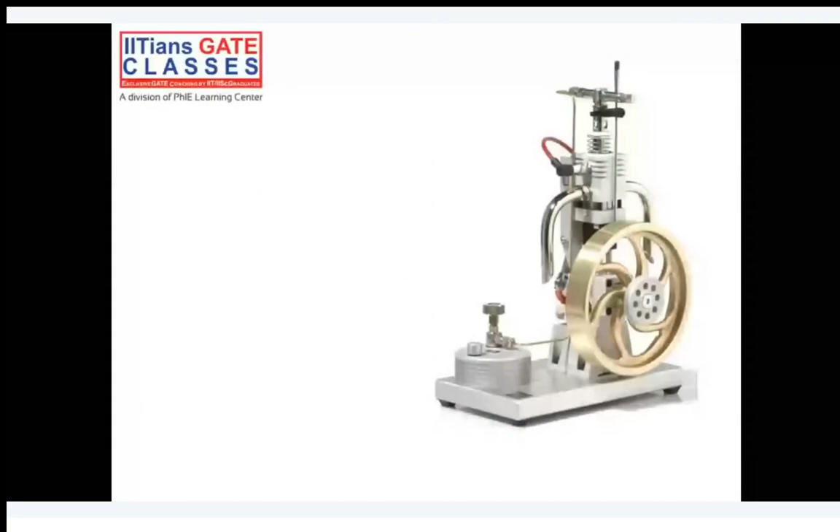So let's start with the definition of the flywheel. Can anyone tell me what is the meaning of flywheel and why we use it, or under what situation you use it?

Yes, it is used to store the energy. So in general, the proper definition would be: a flywheel is used to control the variation in the speed during each cycle of the engine. This last word is very important - cycle of the engine.

And can you tell me what is governor? That is the main reason we are studying these two topics together. Can you tell me what is governor?

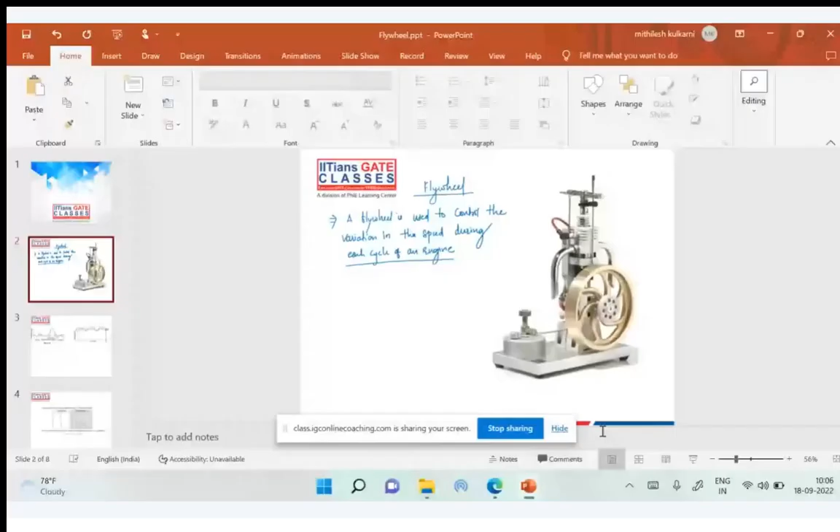So what we can understand - okay, let me share my screen again. Just give me a minute. How about now? Can you see my screen? Yeah.

I was talking about each cycle of the engine. Each cycle of the engine consists of suction stroke, compression, expansion or power stroke, and exhaust stroke. These are the 4 strokes of the engine which complete a cycle, right? So we know that we have to make sure our engine is running smoothly in all these 4 strokes.

It's not like it is running fast during power stroke and in the rest of the strokes it is running slow. In each cycle of the engine, we expect that our engine should run smoothly. So basically we are trying to avoid the fluctuation here.

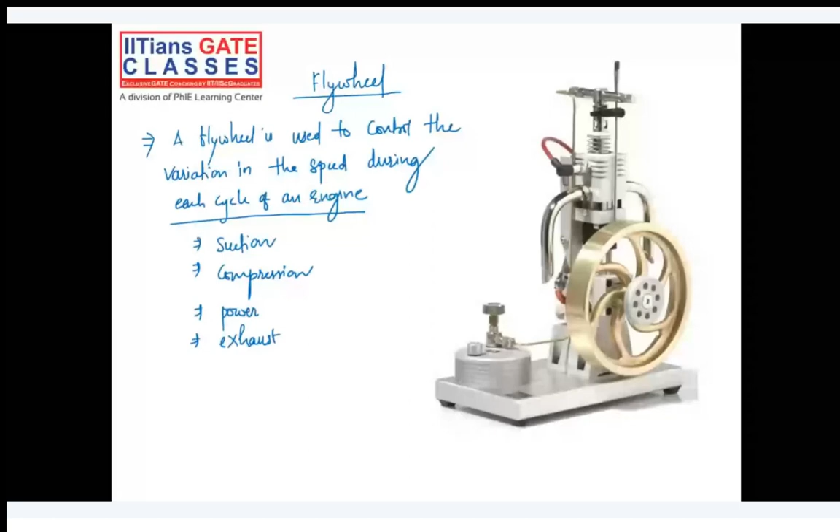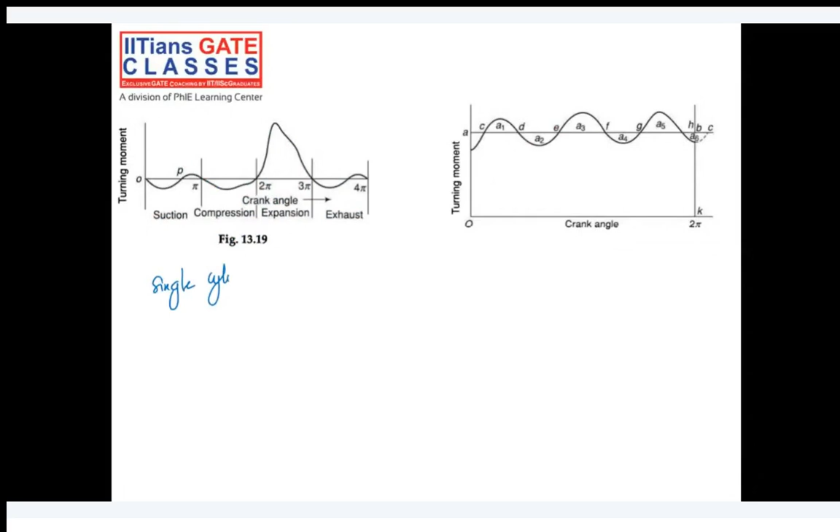Let's take a simple example - this is the turning moment diagram of a single cylinder 4-stroke engine. As I already mentioned, there are the names of the 4 strokes: suction, compression, expansion, and exhaust. And we have only one cylinder.

On the x-axis we have the crank angle. When crank angle is 180 degrees, we have completed the suction stroke. When crank angle is 360 degrees, that is 2 pi, we have completed the compression stroke. Since it's a 4-stroke engine, we have a separate stroke for each: suction, compression, expansion, and exhaust.

On the y-axis we have the turning moment. So this is called a turning moment diagram, where we have turning moment versus crank angle. If we are getting a turning moment positive, what can we conclude, and if turning moment is negative, what can we conclude - this is what you should know.

You can clearly see in this figure, in the expansion stroke the turning moment is positive. Basically, in case of expansion stroke, that means a power stroke, we are getting energy in that stroke, right? So the turning moment or energy is generated during that stroke. In the rest of the 3 strokes - suction, compression, exhaust - you can clearly see the turning moment diagram is on the negative side.

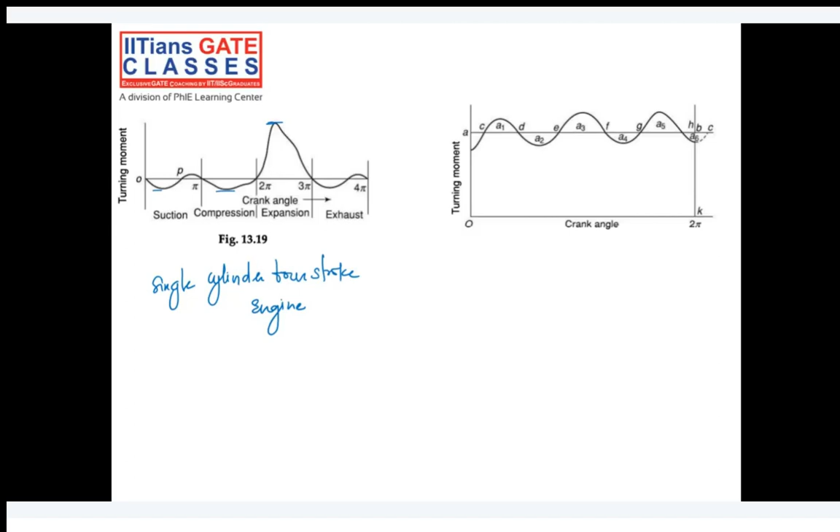So what will happen if I connect a lot of single cylinder engines together and call it a multi-cylinder engine? We generally use it in heavy vehicles. So, multi-cylinder engine - can I expect a similar diagram there, or will it be a little smoother compared to the first diagram? Yeah, it will be a little smoother because whenever we do the balancing of the engine...

We know we don't put the power stroke of all the engines at the same time. We use some ratio in order to do the balancing - we'll study that in the balancing of engine topic. But as of now, you should know that if you are using a multi-cylinder engine, the power stroke of all engines will not occur at the same instant.

At some instance, power stroke happens for, let's say, two engines, and after that power stroke happens for the next two engines. So basically what we are doing is balancing out the forces when we do the multi-cylinder engine. Because of that, at any instant, if you want to calculate the crankshaft torque - or turning moment - it's given by the sum of the torque developed by each cylinder.

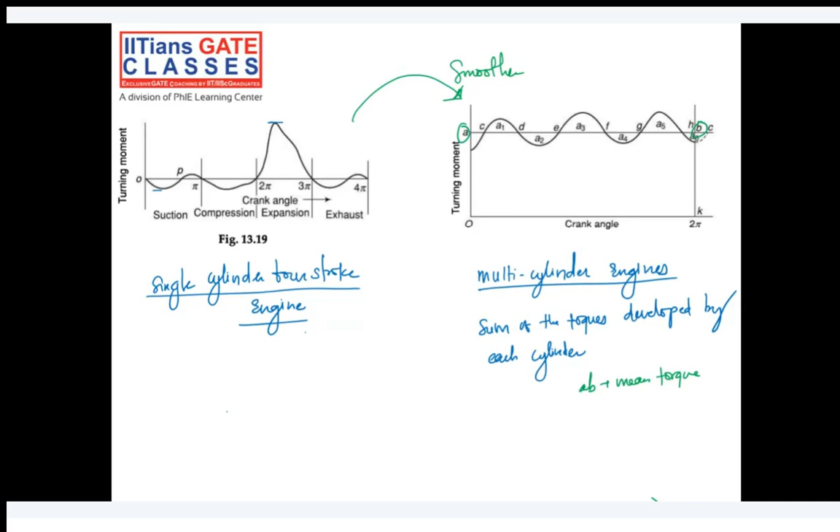We cannot avoid the variation here. We get power in the power stroke, we get energy in the power stroke, but we need energy in the rest of the strokes. So the fluctuation of energy is a lot in case of a single cylinder engine, whereas in a multi-cylinder engine it is comparatively less. So flywheels are very important for single cylinder engines.

So I used the word fluctuation of energy. Let's try to understand what is the fluctuation of energy for different crankshaft positions. From figure number B, we will try to trace it out - we'll use the second figure to understand the fluctuation of energy. You can clearly see here A1, A2, A3, A4, A5.

These are the little fluctuations compared to the mean torque, where A1, A3, and A5 are the areas where the torque developed is above the mean torque, AB.

So we can expect that in areas A1, A3 and A5, our flywheel will store the energy. Whereas in the other areas like A2, A4, and even A6 here.

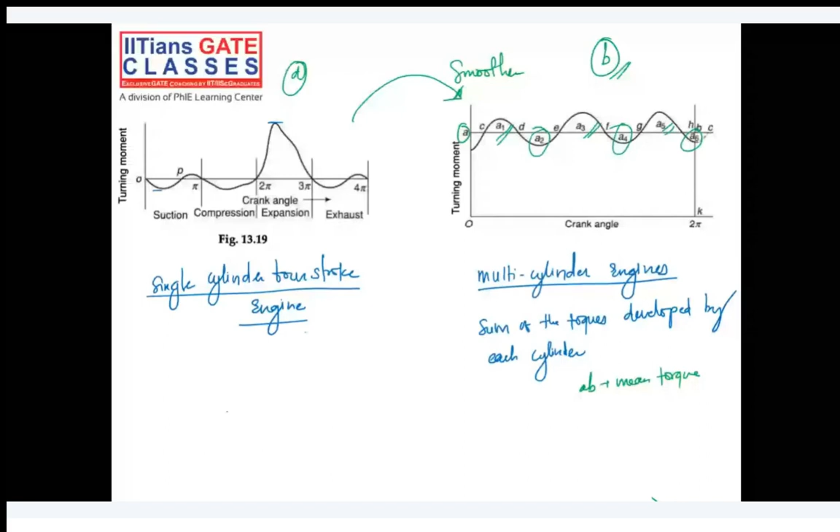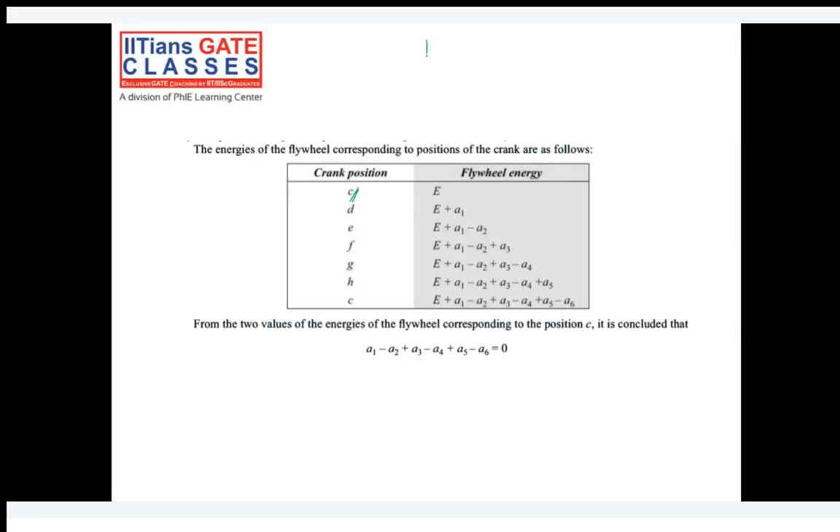So I'll go to the next slide now to make a chart. So at position number C, let me try to draw it here. This is C, D, E, F, G, H. This is A1, A2, A3, A4, A5 and A6, for example. Again this point is suppose C, and the same figure repeats again, C to H.

At point C, at crank position C, let's say E is the energy in the flywheel. At point D, A1 energy will be added to the flywheel, so it becomes E plus A1. At point E, we have added A1, but subtracted A2 energy out of it, so it is E plus A1 minus A2.

Then at point F, we have added the A3 energy. Then we have subtracted A4 energy at point G. Then by the time we reach point H, we have added A5 energy to it, and by the time we reach point C again, we have subtracted A6 energy out of it.

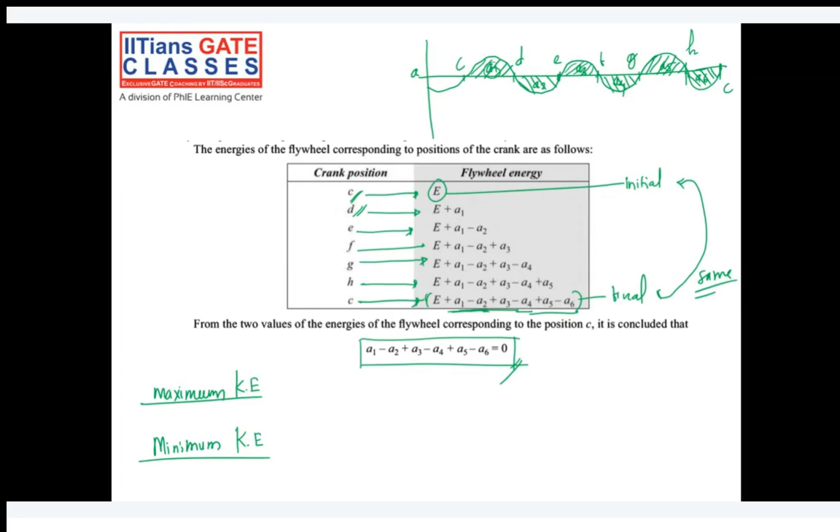So minimum kinetic energy and maximum kinetic energy correspond to maximum speed, because kinetic energy is half of I omega square. Since I is same, only omega is changing, so it corresponds to maximum velocity or speed. This corresponds to minimum speed.

And the difference between this maximum kinetic energy and the minimum kinetic energy is the maximum energy which can be stored in the flywheel. So that is delta E, the energy stored in the flywheel.

The difference between maximum and minimum kinetic energy of the flywheel is known as maximum fluctuation of energy. That much will be the maximum fluctuation of the energy, or we can say that much amount of energy we can store in the flywheel.

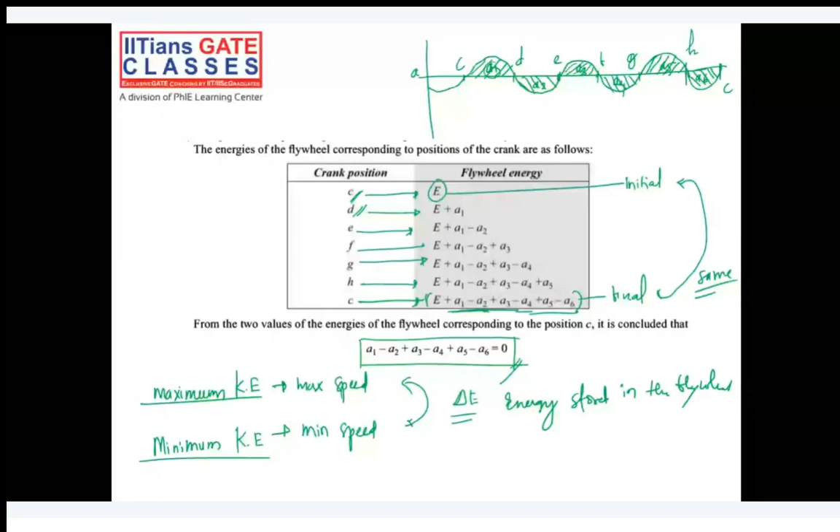So let's try to calculate this delta E through some formulation. Can I proceed to the next slide? We'll start with a simple example. Let's say we have a flywheel.

For example, this flywheel rotates at a maximum speed of omega 1, that is max speed, and omega 2 is minimum speed, for example. So maximum fluctuation of energy, I can say,

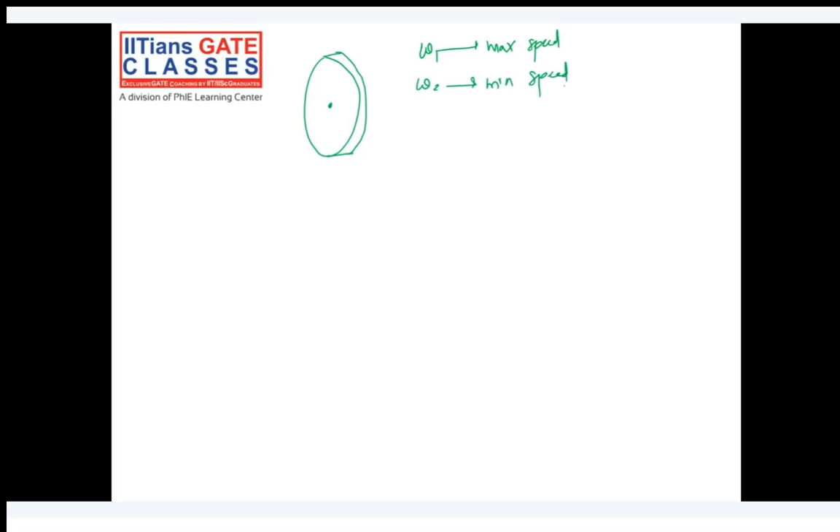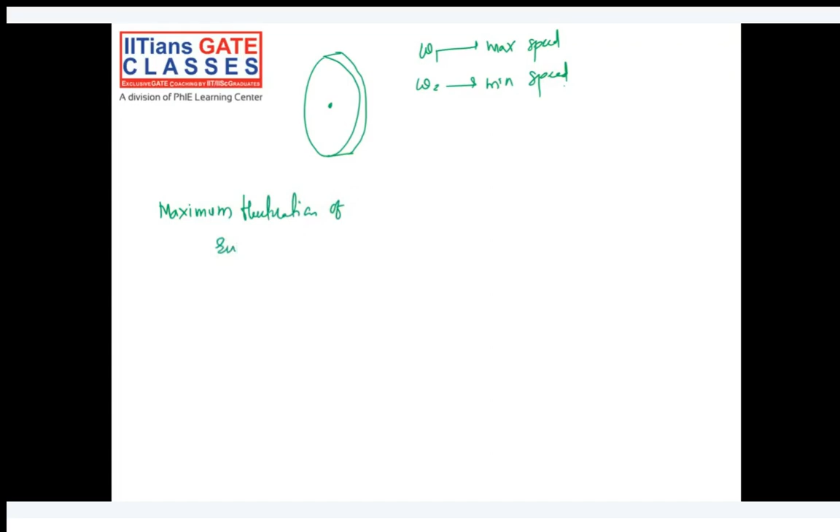delta E would be half of I omega 1 square minus half of I omega 2 square. We can write it like this. Difference in the maximum kinetic energy and minimum kinetic energy will be the maximum fluctuation in the energy. Minimum kinetic energy will be corresponding to the minimum speed of the flywheel, and maximum kinetic energy will be corresponding to the maximum speed of the flywheel.

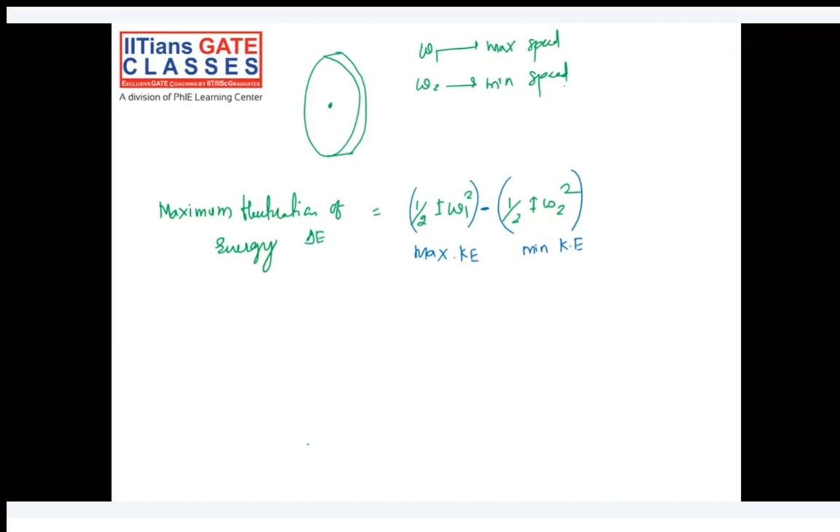So from this I can take half of I as a common, omega 1 square minus omega 2 square, you will get. Half of I omega square. I is nothing but your mk square, mass moment of inertia. I is equal to m is a mass and k is a radius of gyration.

Omega 1 square minus omega 2 square, you can relate it to a square minus b square formula. A square minus b square is equal to a plus b and a minus b. So I can split this into omega 1 plus omega 2 and omega 1 minus omega 2. This 2 I will write here. Sum of omega 1 plus omega 2 divided by 2 will be average, you can say mean speed.

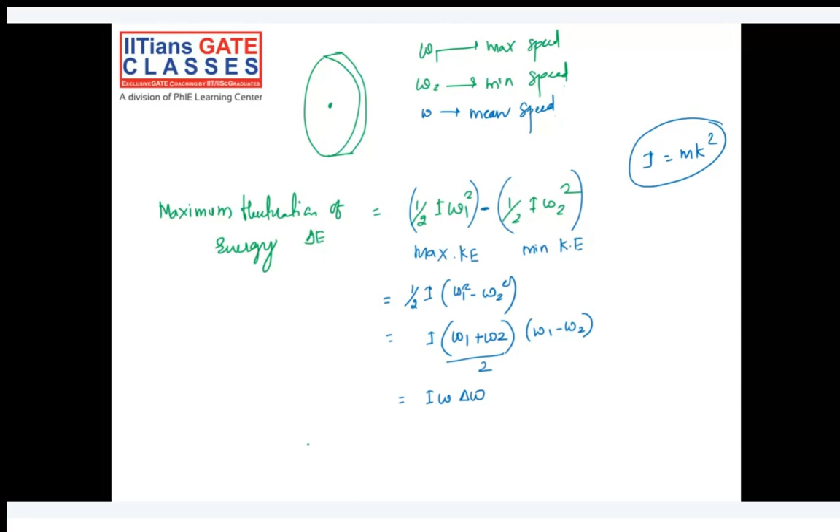Omega 1 minus omega 2 is delta omega. So here omega is a mean speed. So there is one term, this delta omega, which is omega 1 minus omega 2.

So if I multiply with omega and divide with omega, this formula will further change to I omega square delta omega by omega, by multiplying and dividing with omega. I omega square delta omega by omega. So that is your delta E.

I'll go to the next slide, I'll repeat here. We got I omega delta omega, and then we got I omega square delta omega by omega. Delta omega by omega is nothing but the K. And what is this K? Coefficient of fluctuation of the speed.

K is equal to delta omega by omega. This is coefficient of fluctuation of speed. So what is the meaning of it? Change in the speed with respect to the mean speed. So it is a ratio of maximum fluctuation in the speed divided by mean speed.

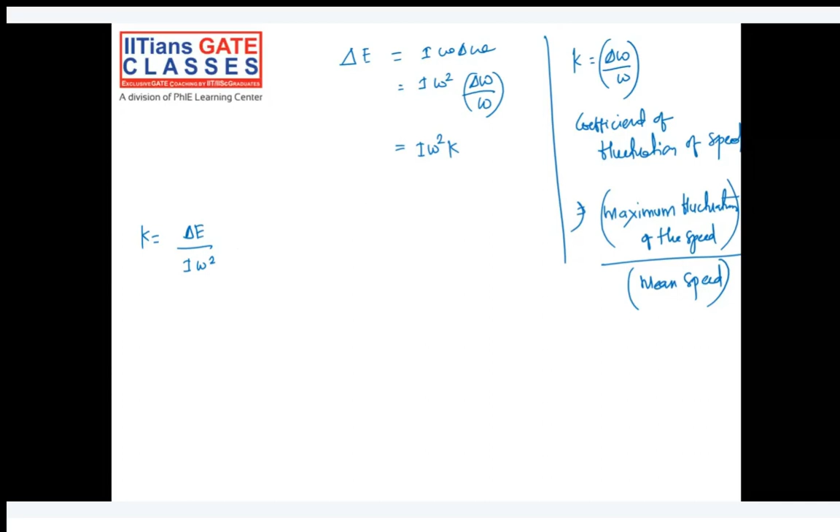Delta E, if you keep it as it is, divided by I omega square, you can multiply by 2, divide by 2. So what is the formula for this? Half of I omega square is what? It's half of I omega square is our mean kinetic energy, can you say, or the mean energy,

because omega is our mean speed. So corresponding to that energy will be our, let's say, a mean energy. So can I write it as delta E divided by 2 times E? E is energy corresponding to the omega. Change in E, delta E divided by 2. So K can also be written as delta E divided by 2E.

One more point here I would like to explain, what is this K? K is our coefficient of fluctuation of the speed, that is delta omega by omega. So here we got one term delta E by E. Delta E by E is nothing but, similarly you can write it as, that is change in the energy, or the maximum fluctuation of the energy to the work done per unit cycle, or the mean energy in general, will give you the coefficient of fluctuation of energy.

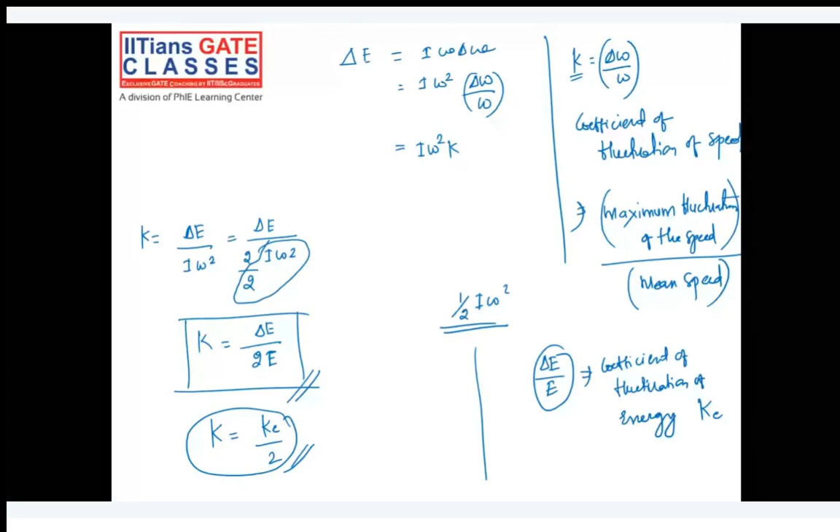I will collect everything on the next page now. So what is K? K is coefficient of fluctuation of the speed, delta omega by omega. And Ke is coefficient of fluctuation of the energy, delta E by... what is delta E? Maximum fluctuation in the energy, that is equal to I omega delta omega. We have further made it as I omega square K.

And we know that K is equal to Ke by 2. This is all. These formulations you should know. All the formulas I have collected here. What is omega? Omega 1 plus omega 2 divided by 2. What is delta omega? Omega 1 minus omega 2. What is omega 1? Maximum speed. What is omega 2? Minimum speed. Okay, is it clear till this?

So, will you be able to calculate the energy stored in the flywheel? If a question comes in exam, how much energy will be stored in the flywheel if they have given you the I value and omega 1 and omega 2 values?

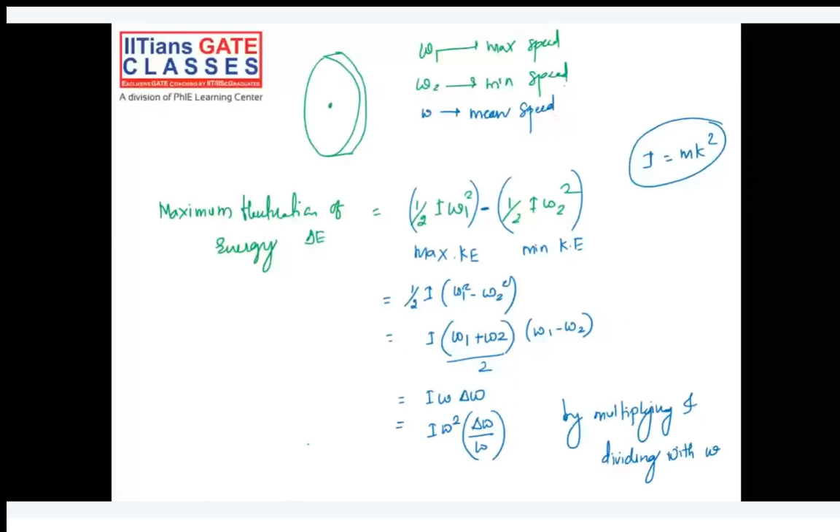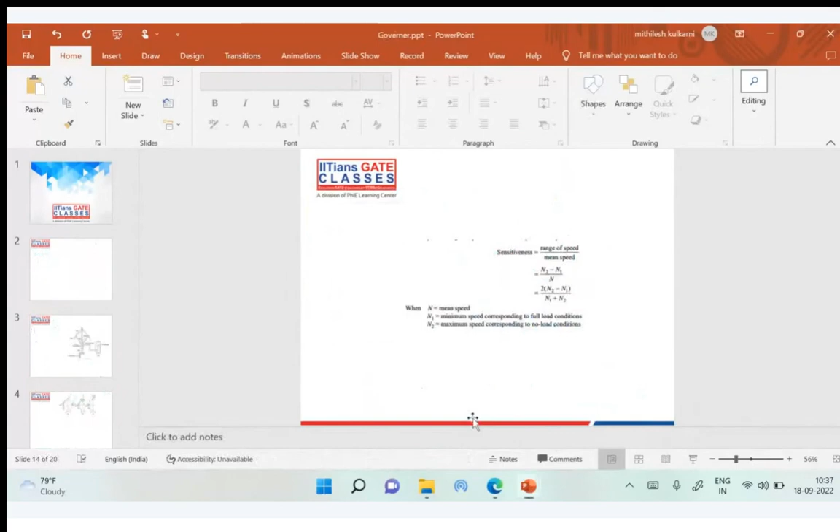Okay, if no doubt, then I'll open another presentation for the topic governors. Okay, so write down heading: governors.

Can anyone tell me what is the difference in flywheel and governor? Roughly, you can say in few words. What do you think? Are they same or are they different?

Yes, one of them is used to regulate the load variation, other used to regulate during each cycle. Correct, because let's say if we are in the bus or the truck, and a truck is fully loaded, then the load on the engine will be more at that time. Let's say it's half loaded, then load will be less compared to the first, and if it's not at all loaded, then again the load on the engine will be less.

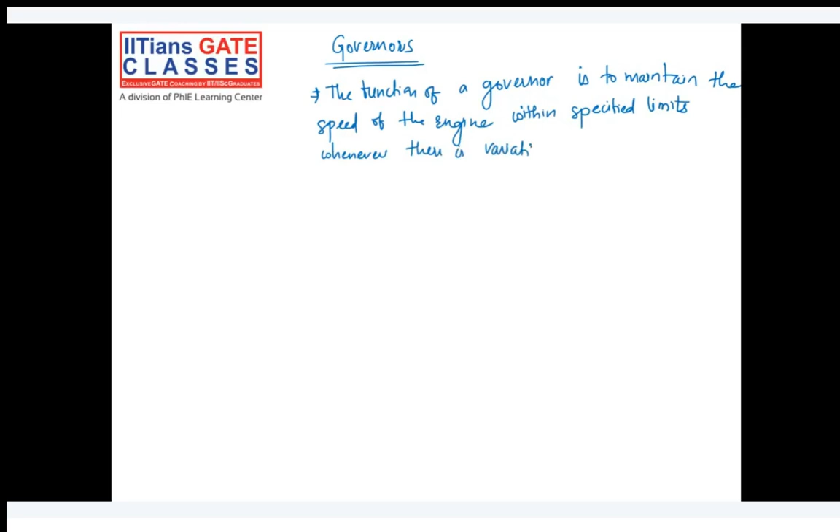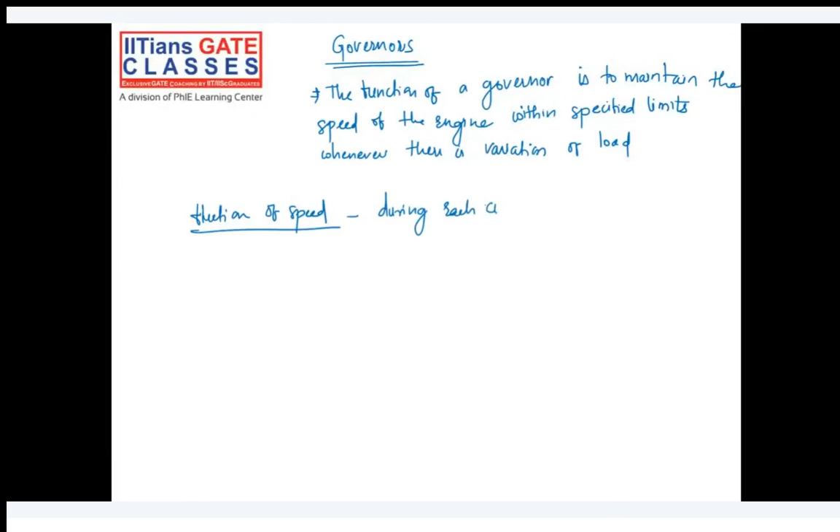So fluctuation of speed - again we are using the same word, fluctuation of speed. And as I already mentioned, the fluctuation of speed can come during each cycle, and the flywheel is capable of handling it. Whereas the fluctuation of speed, as I mentioned, also can come from the variation in output torque of the engine, or basically load variation. Load variation, and governor will be able to handle it.

Is it clear till this? Have you understood the difference?

Okay, so can I say, let's say if you have a governor fitted in a bus or truck, whether it will operate continuously. Let's say we have a truck that is loaded and running on a highway with a certain speed. Will this governor be active during that time? Because there is no change in loading, right? So in that case, in each cycle, the governor will not work.

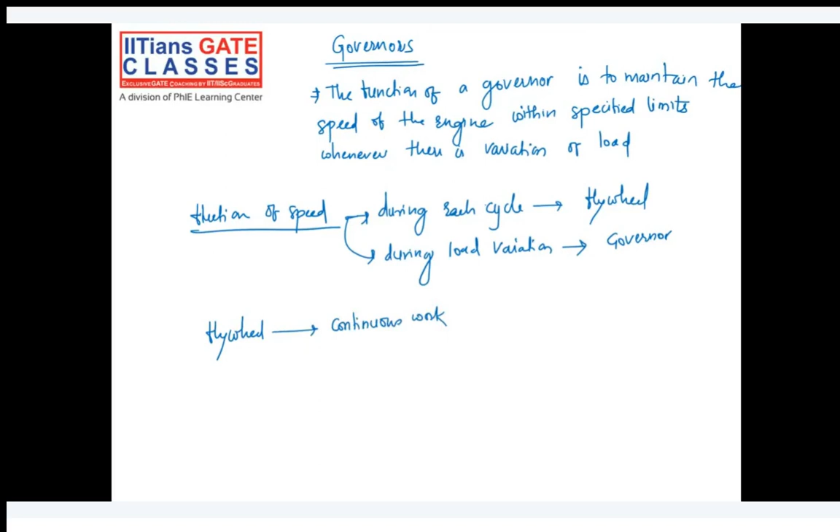Okay, flywheel is doing continuous work, whereas governor is intermittent. Whenever required, it will do work. Because let's say if we have a vehicle which is running at a constant speed with a constant loading, the governor will not be working at that time. There is no need for the governor to be active at that time. So it will not operate in the general way, we can say.

But I have given you the example of a single cylinder engine and a multi-cylinder engine. In a multi-cylinder engine, I would expect very little fluctuation in the energy compared to the single cylinder. So it is worth using a flywheel only in the single cylinder engine, where we see a large fluctuation in the energy. A flywheel may not be used if there is not a lot of cyclic fluctuation in the energy output. But a governor is always essential in all types of engines, because we have to adjust the supply and demand. Depending on different loading, we need different torque, and the governor is necessary irrespective of whether you are using a single cylinder or multi-cylinder engine. Are you following these points?

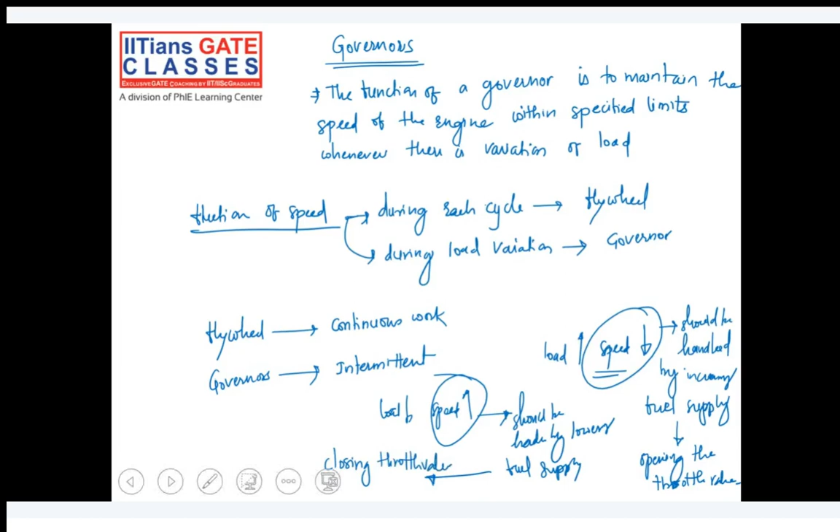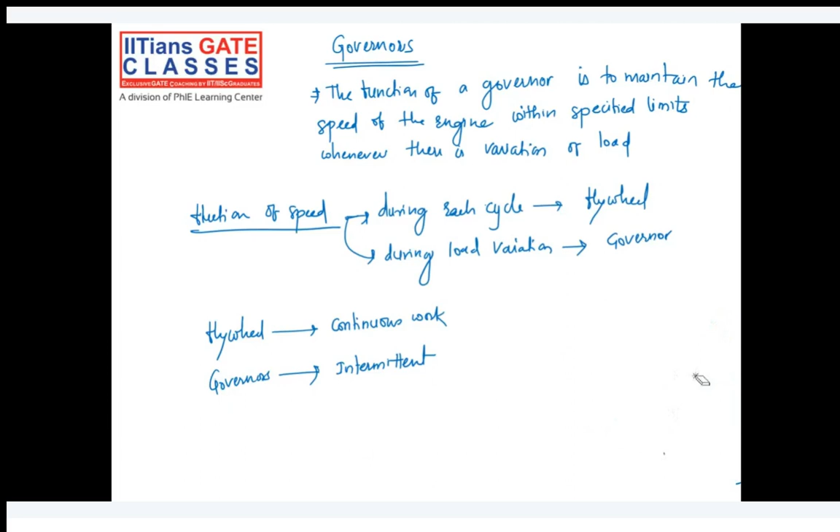Let me rub this out and write it in a better way in the next slide, because the next slide will help you understand more easily than writing on the same slide. So you can clearly see, this is an engine. If the load increases, the speed is reduced, and it is handled by increasing the fuel supply. And how will you do this? Opening the throttle valve.

Okay, so if you open the throttle valve, opening the throttle valve means if you rotate this throttle valve to, let's say, a 90-degree angle, like this, then it will fully open. Fuel supply will be more. So if fuel supply is more, then again you can increase the speed and basically maintain your speed.

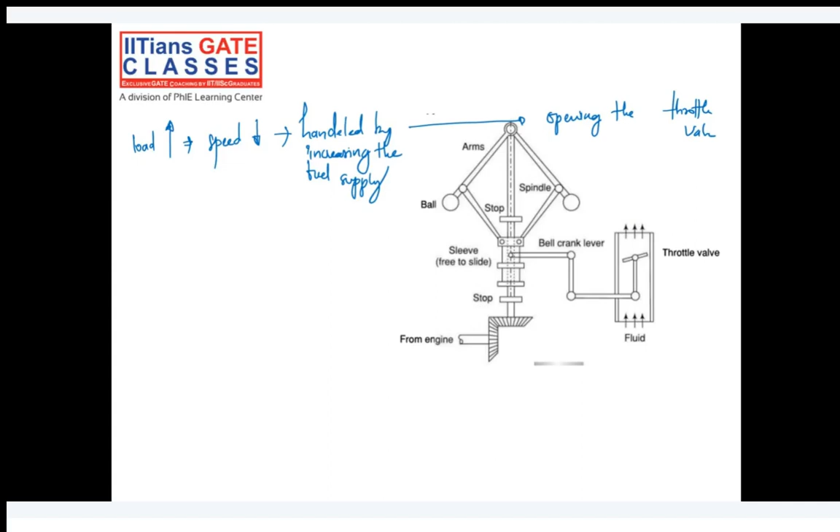On the other hand, if load is reduced, speed will increase, and this is handled by the governor. We should decrease the fuel supply. And how will you decrease the fuel supply? By closing the throttle valve. This means we are trying to make this throttle valve horizontal in order to lower the fuel supply. So I hope you understood how exactly this is different from the flywheel and how it operates.

Basically, the ultimate aim of the governor is to operate the throttle valve. Governor is used to operate the throttle valve. What the governor does is operate the throttle valve, and indirectly, by operating the throttle valve, we are controlling the fuel supply, and by controlling the fuel supply, we can either increase or decrease the speed of the engine. So this is how they are linked to each other. Is it clear till this?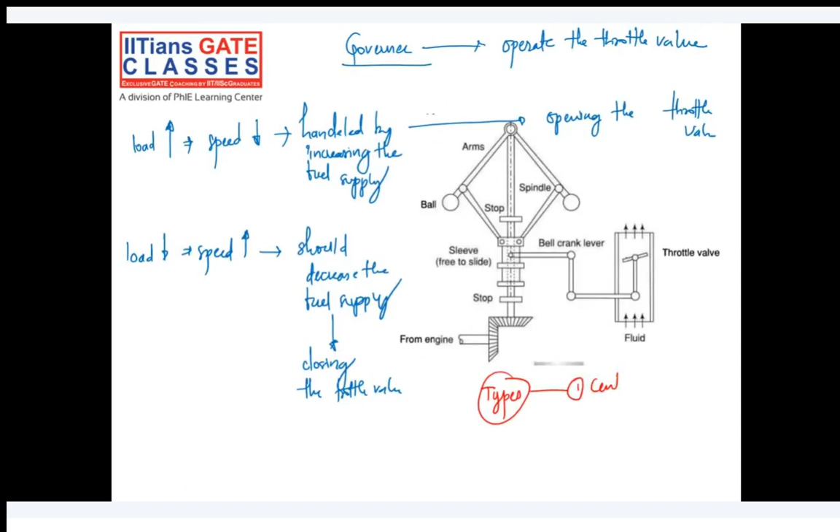Any doubt till this? Okay, so there are two types of governors. Governors are of two types. First type is centrifugal. Second type is inertia. Okay, centrifugal governor and inertia governor. So let's try to understand them in detail.

What is a centrifugal governor? This is the more common type. Centrifugal is commonly used, and its action depends on the change in the speed. The name itself indicates that, because of the centrifugal force, this governor will operate. Let's look into this figure. We have a pair of masses, let's call them balls, which are fixed to the arms. This is a spindle. When you rotate the spindle at a constant speed, the distance between the two balls will remain constant. But if you increase the speed, the balls will try to move away from each other because of the centrifugal force, and indirectly it is lifting the sleeve.

And if the sleeve is lifted up, it will close the throttle valve, because speed is increased and it's time to close the throttle valve. If speed is reduced because of higher loading, then these two balls will come closer to each other. The sleeve will go downwards and it will open the throttle valve, making sure enough fuel is flowing through it, which will help to increase the speed. I hope you understood the centrifugal governor, which is more common.

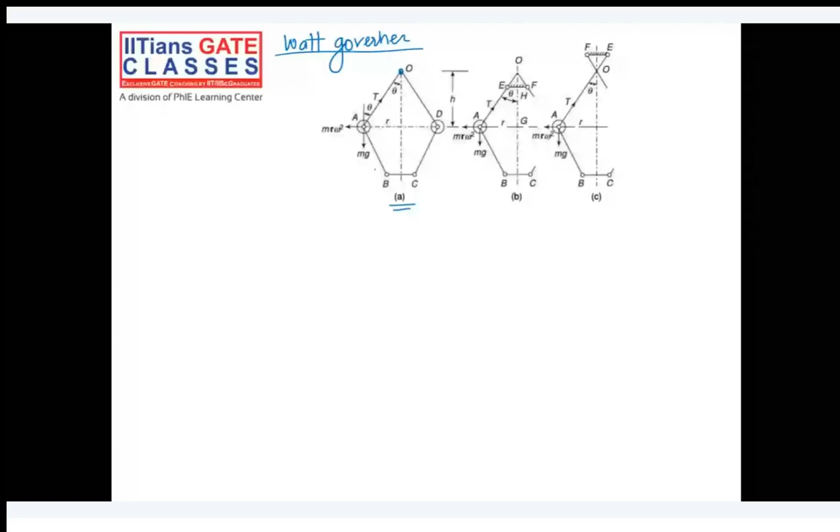Okay, so this you can convert like this, or this you can convert like this. Rather than a single point, if you replace it with a link EF, you can call it the open arm type Watt governor, and this is the crossed arm type Watt governor. In the second case, we are making a crossed arm. So they are just two different types of it. Our focus will be on the first figure A itself, but figures B and C are more or less the same. It's just a different type of it.

Okay, so let's now focus only on figure number A. I just explained how B and C are generated. If you replace point O with the horizontal line EF, you call it the open arm type, and if you cross the arms and create a link FE, you call it the cross arm type Watt governor. Okay, so let's try to understand figure A now. As the spindles are rotating, balls will take up a position. Depending on whether the speed of the spindle is increased or decreased, arms will move away from each other or towards each other because of the centrifugal forces.

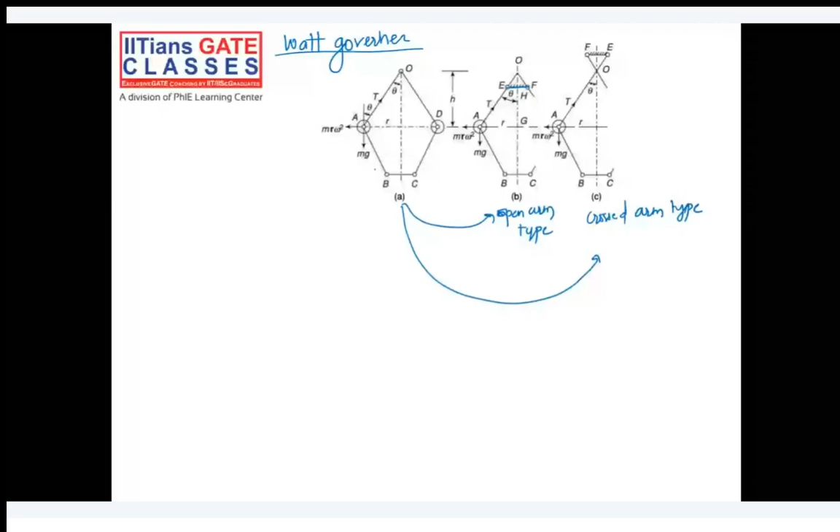Okay, so just to let you know, here small m is the mass of each ball. H is the height of the governor. W is the weight of each ball, which is mg. Omega is the angular velocity of the arms and sleeves. I'll go to the previous figure. The angular velocity of the spindle will be the same as the angular velocity of the sleeves, and that will be the same as the angular velocity of the balls. So I'll just use the words angular velocity. It is the angular velocity of the balls, arms, and sleeve. T is the tension in the arm.

Okay, we are drawing a free body diagram of point A just to make sure what forces will get applied on the arm. R is the radial distance to the ball center. This is R, the radial distance from the ball center to the sleeve center. So assume that these links are massless and you neglect the friction of the sleeve.

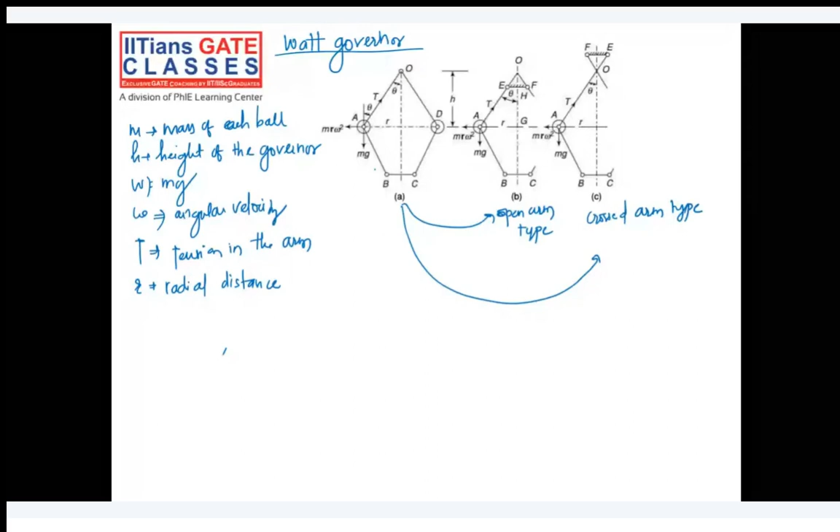Okay, and how will this point A look under the action of equilibrium? Point A will have mg force in the downward direction, mr omega square force, which is the centrifugal force, in the outward direction, and T is the tension in the upward direction. So if I split this tension into two components, T cos theta and T sin theta, I will be able to write, let's write here itself first: T cos theta is equal to mg, and T sin theta will be equal to mr omega square.

Okay, I hope you understood how I have written this. So if this is T, this side is T cos theta, and this side is T sin theta. So I'm just equating the forces. You might have studied this in mechanics. So the ratio of this will be tan theta.

So m will get cancelled. So it's r omega square by g.

Tan theta can also be written as r by h. This is your r and this is your h. So r by h is tan theta. So you can say h is equal to rg divided by r omega square. So rr will get cancelled. So h is equal to g by omega square.

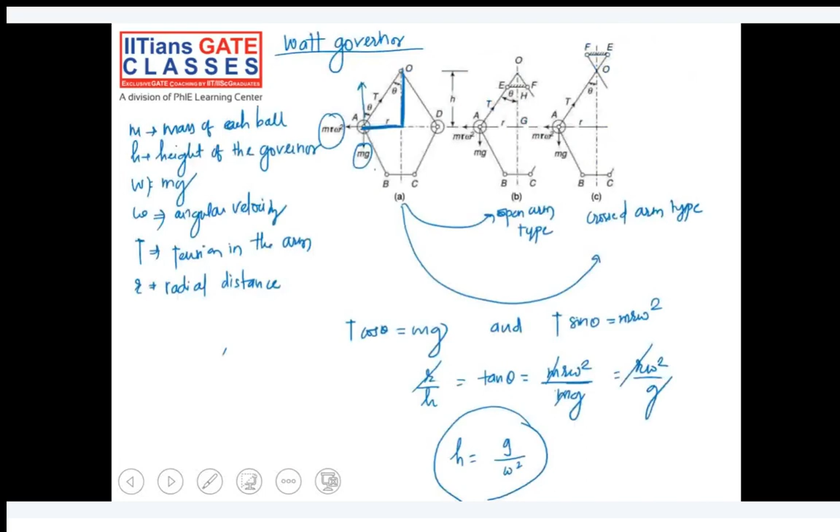Okay, try to understand this height will change. As the speed is increasing, these balls will come like this. Do you agree? This h will become smaller. If speed is reduced, these balls will come closer to each other, and in this case h will increase. So basically h is inversely proportional to n square in this case. That is what you should know. We are basically depending on n square, h is changing, and depending on h your sleeve motion is changing, and depending on the sleeve motion your throttle valve is opening or closing, and that is controlling the fuel supply, and that is controlling the speed of the engine.

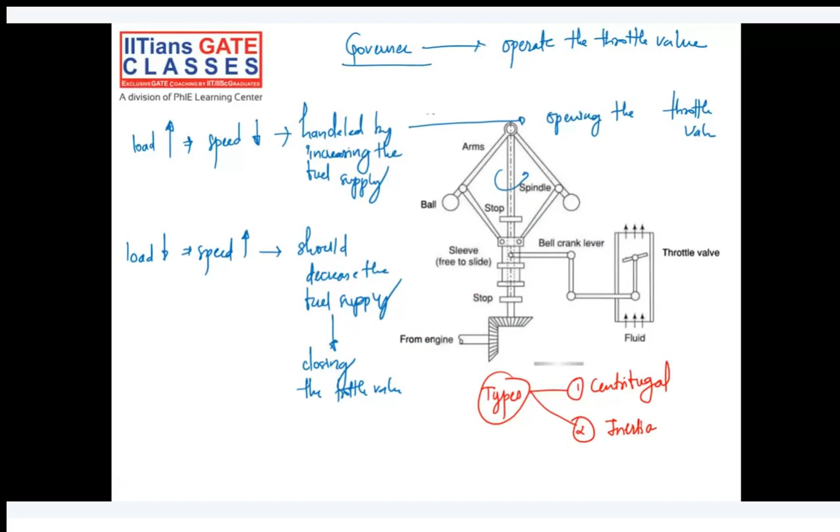Is it clear till this? Everyone understood how n and h are related? I'll repeat here. N increases, h will reduce.

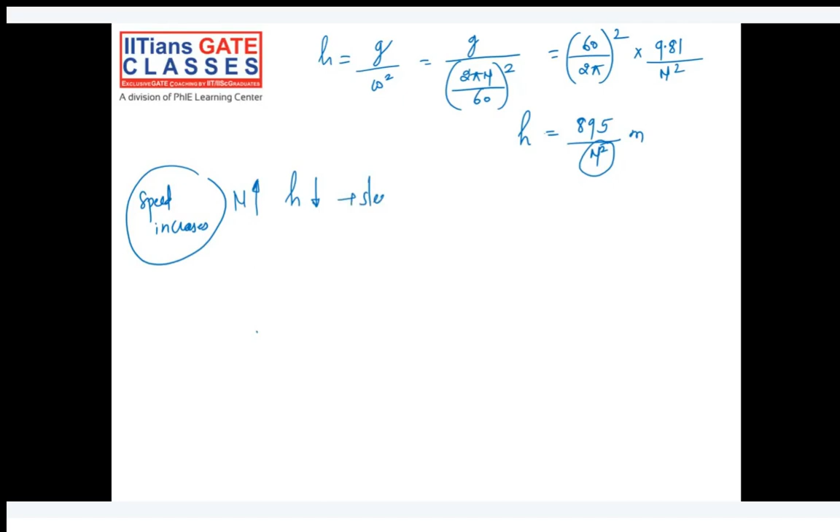I'll say that speed increases because of, let's say, lower load. H will reduce. H will reduce means what? Sleeve will move up. Sleeve will move up means what? It will close the throttle valve. It tries to close the throttle valve, and it will reduce the supply of fuel. And if fuel supply is reduced, what will happen? Speed will again reduce.

So in this way, basically, we will maintain the required speed. And you can do the opposite for n reduction. Here it will be just opposite of what we have written. I hope it's clear. So here it is completely depending on n, no other parameter.

If I make a chart for different values of n, how will h vary. N is in rpm, h is in millimeter. The chart will look like this: 50, 100, 150, 200, 300, 400. Let's say h is 358 millimeter, then 89.5, 39.8, 22.4, 9.9, 5.6.

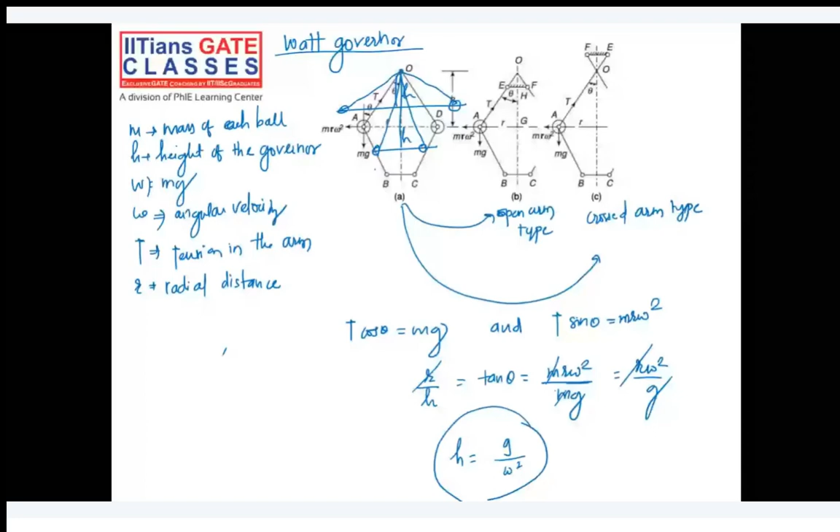Okay, so the next type of governor which I would like to introduce is the Porter governor. Is it clear to everyone how this Watt governor looks like and what are its issues and how it works? Yeah. So I'll go to the next slide now. Write down the heading: Porter governor.

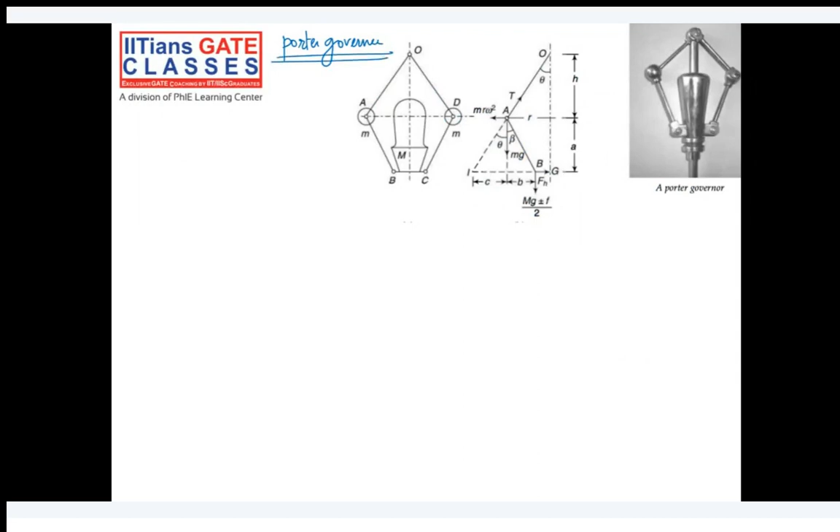Okay. So in the last class, we didn't have this kind of bigger sleeve. So what we have done here is we have added some mass to the sleeve. Let's call this capital M. Capital M is the mass of the sleeve. Rest of the stuff is the same. Small m is the mass of the balls. Just one new thing we have added is a mass of the sleeve.

Okay, so basically now not just centrifugal force, but the force because of this mass of sleeve, that is capital M times g, will also affect. Okay, so this capital Mg will be in downward direction, correct? And if this sleeve moves in upward and downward direction, it will cause a friction on a spindle. So not just the one force of the weight itself of the sleeve, but frictional force also will come into the picture. So here the forces are a bit more compared to what we have studied previously.

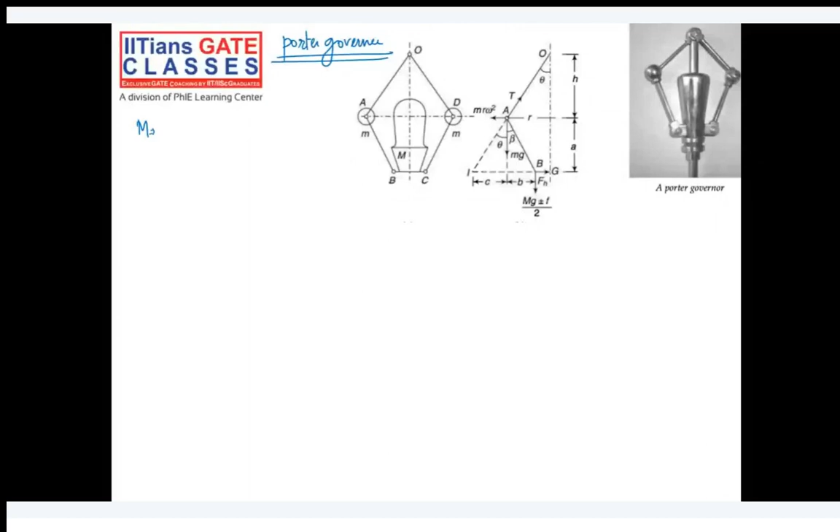Okay, so here capital M is the mass of the sleeve, small m is the mass of each ball, F is the force of friction at the sleeve. Okay, what is the force of the friction of the sleeve?

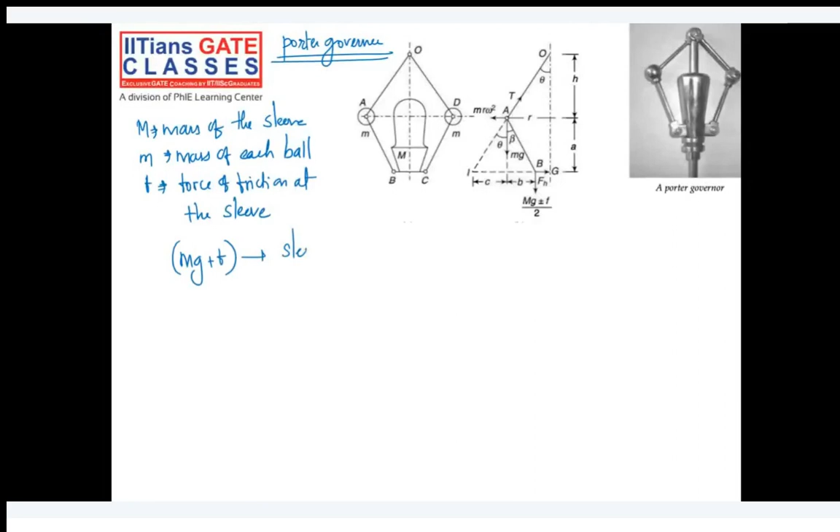Force of the friction always acts opposite to the motion of the sleeve. Okay, so whenever the sleeve is moving up, the force will be in downward direction. So total downward force, I would say in that case, is mg plus f, when sleeve moves up. Okay, and when sleeve moves down, the frictional force will be in upward direction. So mg minus f will be the force when sleeve moves down. Okay, our assumption is downward force f will be positive. I hope it's clear. H is the height of the governor in this case.

R is the radial distance from the center towards the ball center. And we have other parameters like a, b, and c, which you should know. Okay. So let's draw the equilibrium diagram again at point A. So at point A, how many forces are applying? We have a tension, we have centrifugal force m r omega square, and we have mg. So these three were as before.

Apart from that, what we have at point B, we have a new force, that is mg plus or minus f divided by 2. Why divided by 2? Because, let's focus, I'll draw this figure like this. Half of the weight will be taken by this joint B and half of the weight is taken by joint C. So that's why mg plus or minus f by 2. Okay, so I hope you understood why divided by 2 we are doing. So at point B, mg plus or minus f divided by 2. Plus or minus because depending on the motion of the sleeve, either it will be plus or minus f. Okay, so this B point is different, A point is different.

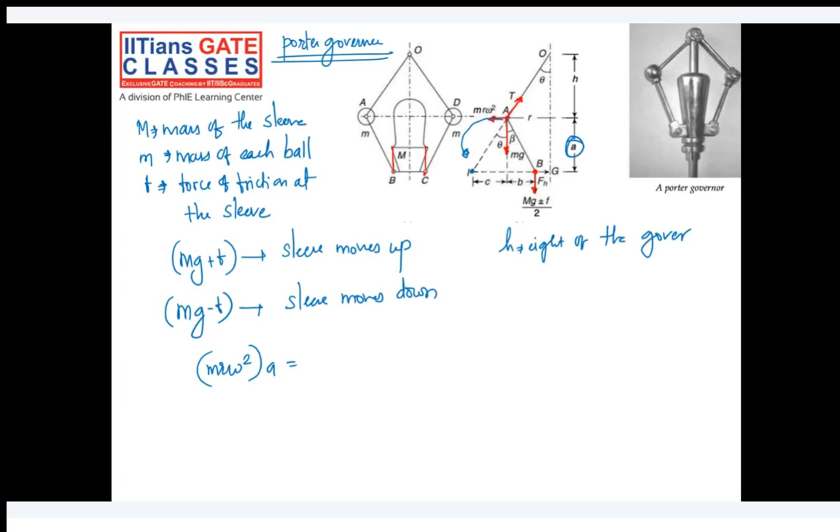Yeah, Sean, your question I had just gone through. I haven't seen it before, but yes, you are correct. The governor we have studied previously is not suitable because it is less sensitive at a higher speed. Yeah, correct.

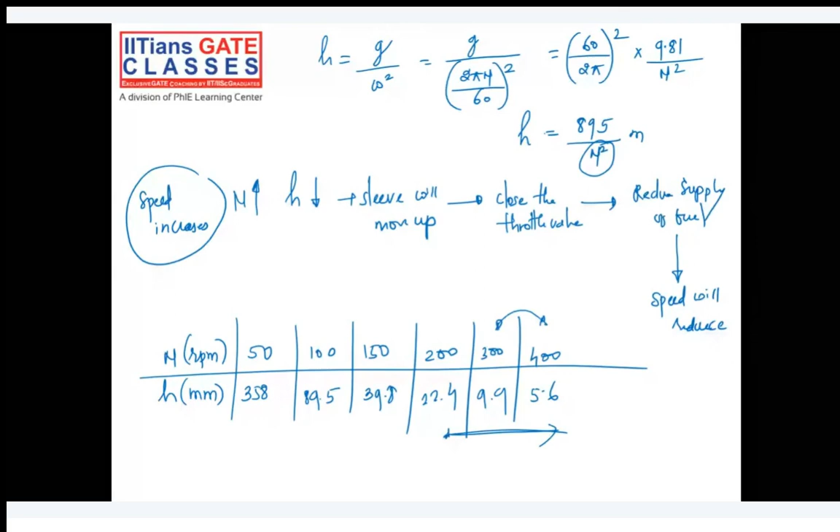Coming towards the point which I was explaining here, m r omega square times a is a counterclockwise moment, and we have clockwise moments of mg into c plus capital Mg.

Okay, this is capital Mg plus or minus f divided by 2 into c plus b. So if you divide with a, what will happen? C by a. Can I write it like this? So this a I am moving here, removing it and passing it to the right hand side. So what is c by a? C is perpendicular, a is horizontal, it's tan of theta. So it's mg tan of theta

plus capital Mg plus or minus f divided by 2, tan of theta plus b by a is tan of beta. Okay, tan of theta plus tan of beta.

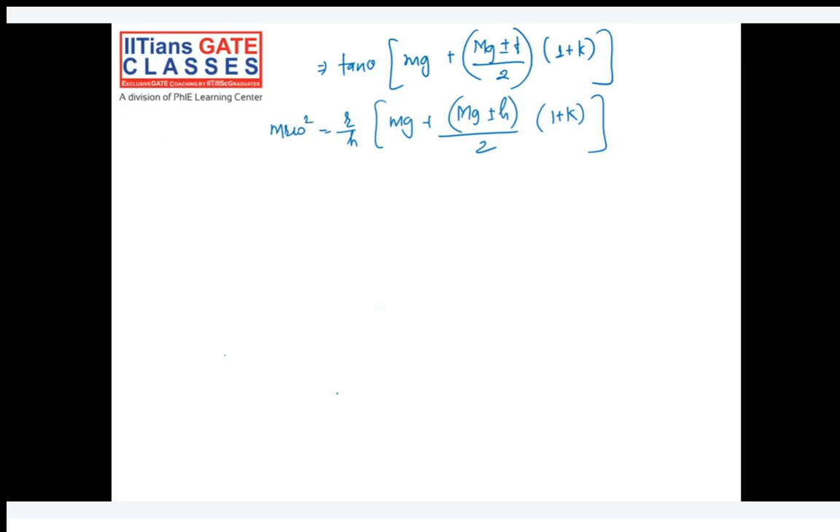So basically here now r will get cancelled, and this m, if you take on the right hand side, some things also will get cancelled out. So omega square I can write it as 1 upon mh. So m, if you keep it here, I'll just write here itself to avoid rewriting. Omega square will be equal to, this is mr omega square, rr was getting cancelled, so it is mh. 1 upon mh. Is it clear till this?

1 upon mh times 2, 1 upon mh. And if I write 2mg here, let's take an LCM here and write it like this. Just simplification, nothing else, I'm just simplifying the terms. What is omega? 2 pi n by 60. So 2 pi n divided by 60 whole square is equal to

what we can say. Let's take this m inside. I will write this m inside, and I will multiply with g and divide with g. And I will write it as g by h, 2mg plus capital Mg plus or minus f into 1 plus k divided by 2 times mg, small mg. Okay, this is clear.

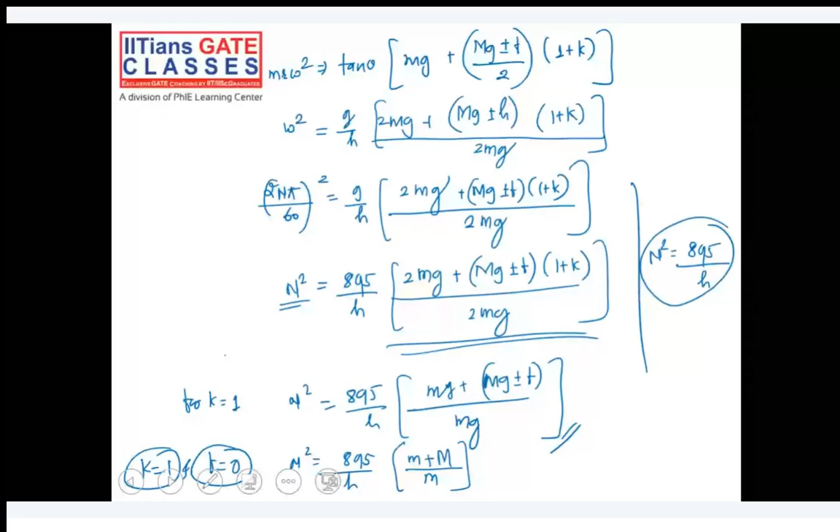So in case of Porter Governor, our balls are just at the joint of two links, link OA and OB. Wherever it's joining, we have the mass of the ball there.

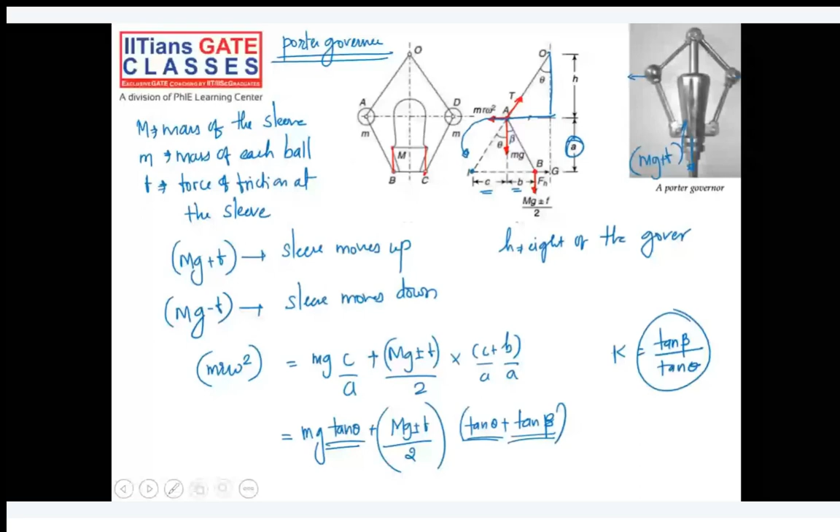Now let's go to the next slide and write down the heading Proell Governor.

This is just for your understanding, I will not go into much detail. The only difference between this and what we studied before is where the masses are fixed. If you fix the masses here, it is our Porter Governor.

But if we are making a separate link AE and DF, and on top of that fixing the masses, then this BAE link and CDF link are getting created. This kind of governor is called a Proell Governor.

I hope you understood the difference. This is more or less similar to the Porter Governor, but the masses are fixed a little upward here, not on the joint itself, so it will create slightly different moments.

So here you are not supposed to take the moment the same way. Your force mg will be here, mr omega square will be here, and it will not be r now, it will be r dash, because this r dash is a little offset.

If it is straight here, that's fine, it will be r. But if it is moved up outward a little bit, then if straight I would say r dash equals r - that's a special case. In general, r dash and r are different.

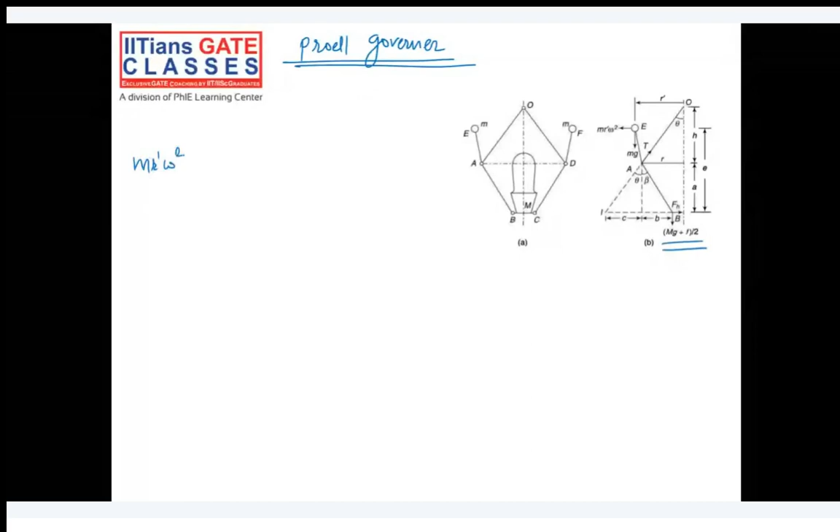This force is more or less the same. So you can do the same thing here: m r dash omega square equals mg into this distance, which is c plus r minus r dash, plus capital Mg plus or minus F divided by 2, into c plus b.

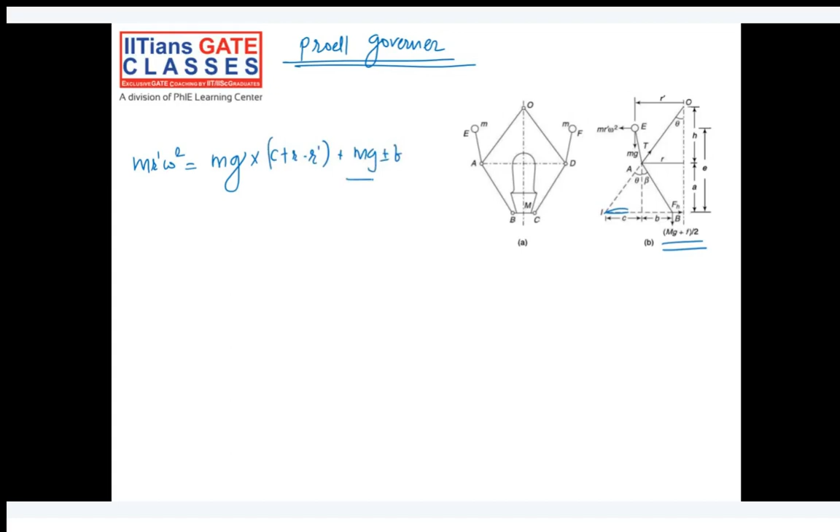So you can clearly see the r dash term is coming and this term is different, but other things are more or less the same. So if you take a moment about point I, this is what you will get. Are you following till this?

Yeah, it's more or less similar to the Porter Governor, so I'll do the calculation fast now. We'll not go into more details here.

So mr omega square into e - because mr omega square into this distance e will create a counterclockwise moment - so e I will take here.

For example, let's say this is vertical, then I can say r dash is equal to r if it is vertical. So then this r and r dash will get cancelled.

So the same thing I can write: m r omega square will be equal to 1 upon e times mg times c, plus capital Mg plus or minus F divided by 2, into C by A into C plus B basically.

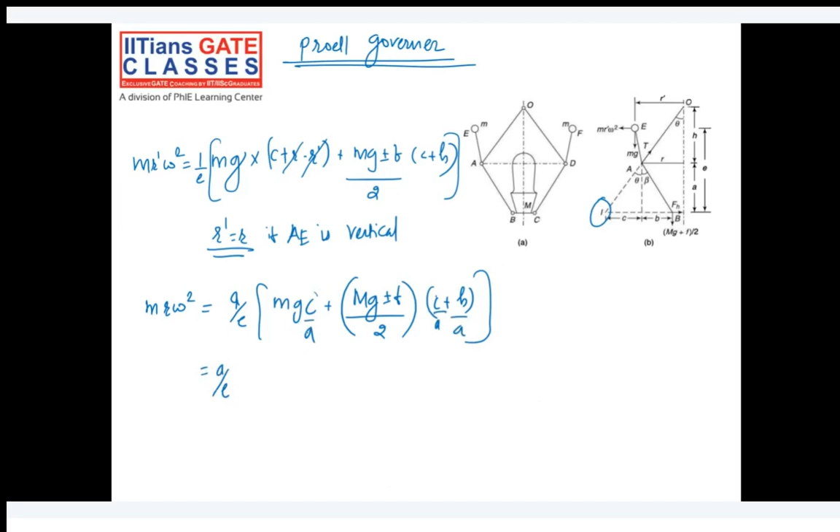And if you multiply with A and divide with A, what will happen? C by A here, B by A here, you will get A by E. C by A is tan of theta, B by A is tan of beta, so tan of theta you can take common.

Again the same way, mg plus or minus f divided by 2, I will write 1 plus k, because k is tan of beta divided by tan of theta. What is tan theta? Tan theta can also be written as r by h - this is a more simplified version of it.

Then mr I can take here, mrr will get cancelled. m omega square will be on the left hand side, m I can take to the right hand side and make it 2mg, writing g also in multiplication. Omega I can write as 2 pi n by 60 whole square, so 60 square divided by 2 pi square into g I can bring to the right hand side and make it 895 by h.

So a by e as it is into n square is equal to 895 by h, A by E, mg plus capital Mg plus or minus f into 1 plus k divided by 2mg. In the last type, that is Porter governor, A by E was not there. If you remember the formula correctly, 895 by h, mg plus 2mg plus mg plus or minus f into 1 plus k divided by 2mg was there, but this part was not there. So this is an additional part here. You should know, in Proell governor, what is the difference? A by E term is coming here.

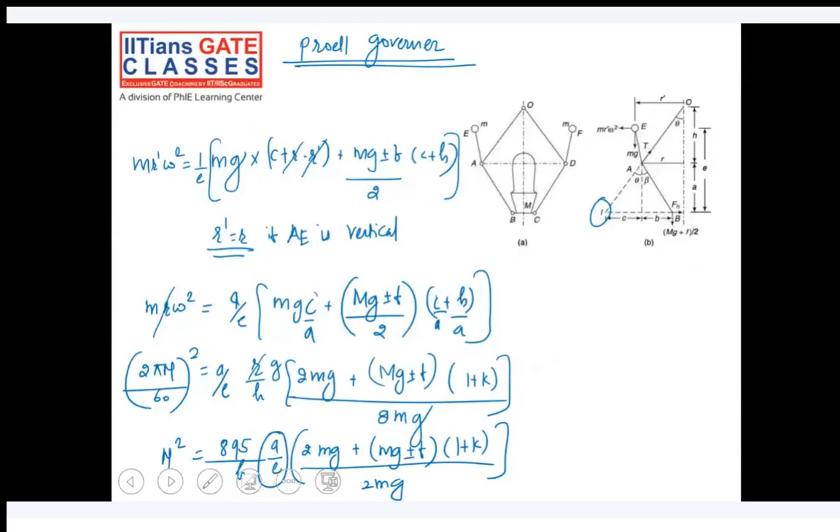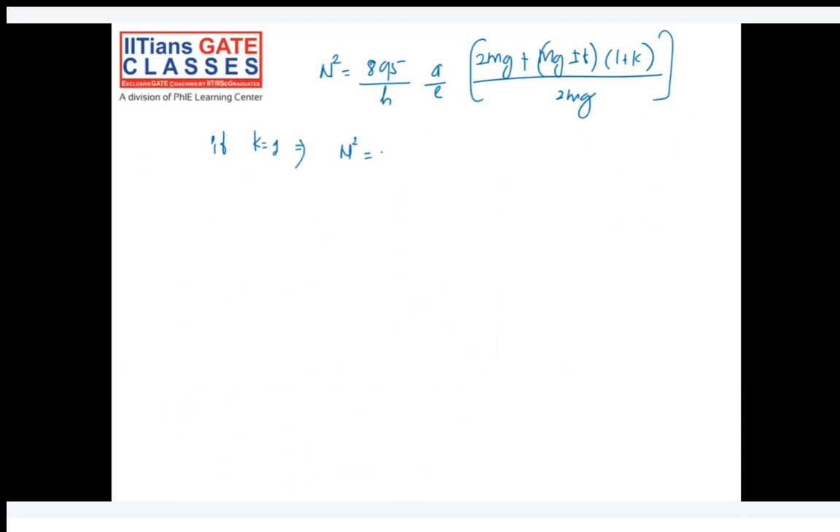So if k is, again same thing, let me write it again. N square is equal to 895 by h, A by E, mg, 2mg plus mg plus or minus f into 1 plus k divided by 2mg. Now if k is equal to 1, what will happen? N square is equal to 895 by h, A by E, 2mg plus mg plus or minus f into 2 by 2mg. 2 will get cancelled, so this is what you will get.

So if f is equal to 0, what will happen? Just f equal to 0, k is not equal to 1. In that case, n square is equal to 895 by h, A by E, 2mg plus capital Mg, 1 plus k divided by 2mg. Here you can rub this g part.

And now let's say if k is equal to 1 and f is equal to 0, n square will be 895 by h, A by E. 2 will get cancelled, m plus capital M divided by small m. So this is more or less the same formula, only A by E is different here.

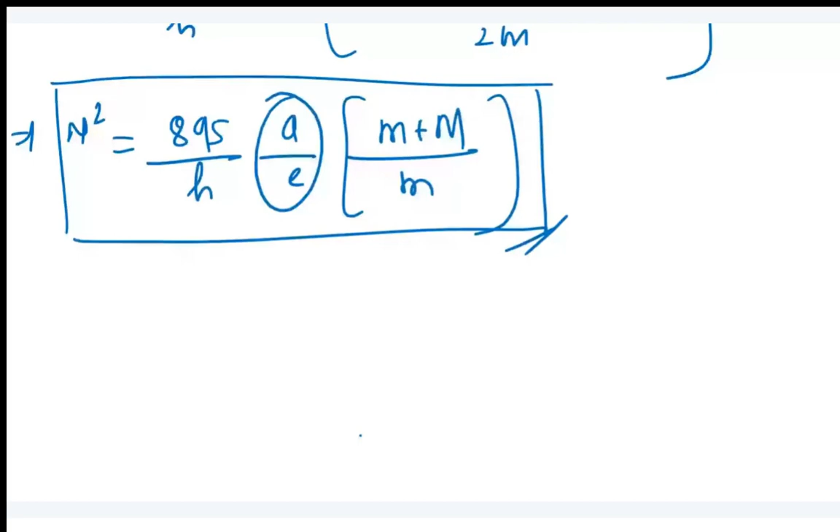So how Proell governor or Porter governor is different from Watt governor, you should know. There is, initially we have studied this formula. In the second case, we have added this term, and in the third case, we have added A by E term. So each different type comes up with some different terms here.

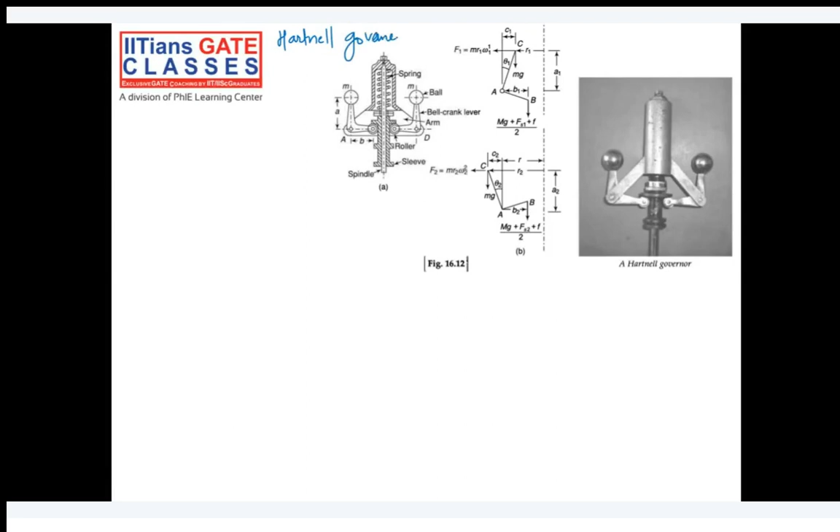Another type we will study here is Hartnell governor. One more type of governor we'll study here, that is Hartnell. All of these are centrifugal governors, and these are more commonly used. Write down heading Hartnell governor.

So in all the previous examples, we can clearly see either sleeve is there or balls are there. In the first case, sleeve mass was also not there. In the second case, we have added sleeve mass. In the third case, we have added sleeve mass, and on top of that, we have added some offset to the balls. In Hartnell governor, what we are doing is we are controlling the balls by a spring here.

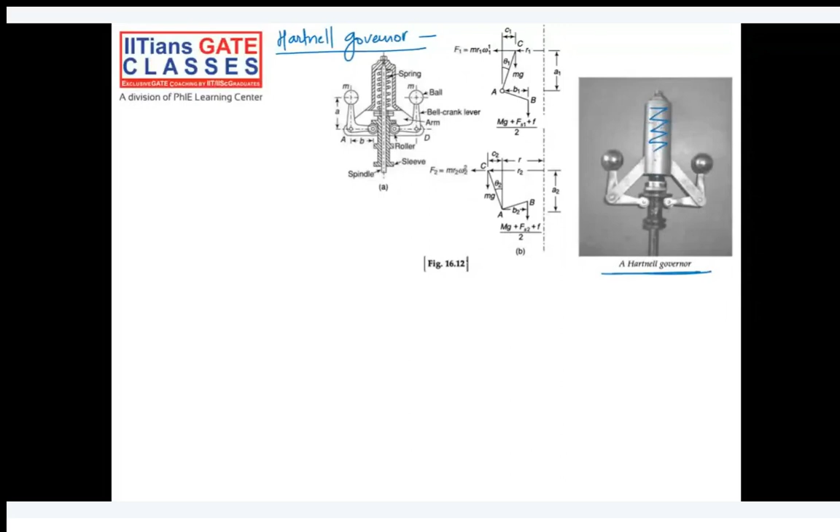So you can clearly see here we are using a spring arrangement. Inside, this spring is there, here you can clearly see. So I'll repeat, balls are controlled by spring. You can clearly see in figure A here. Initially the spring is fitted in compression. You have the nut here to control the compression of the spring. On top here we have a nut to control the spring compression.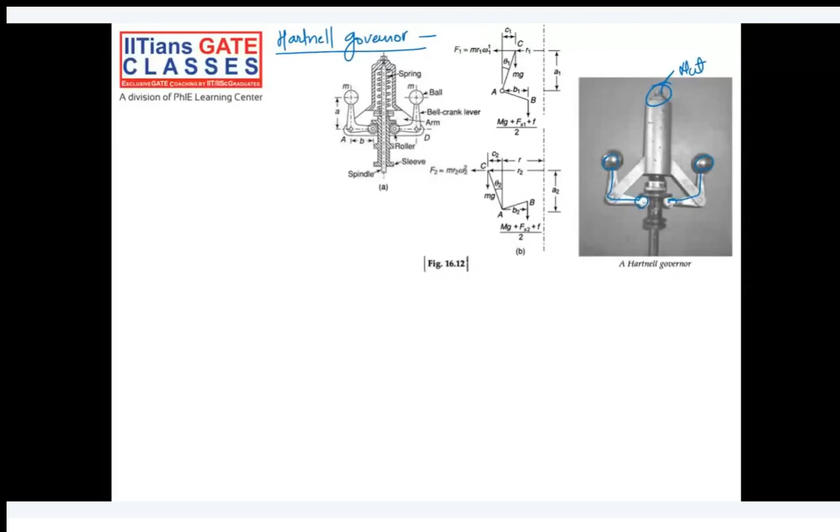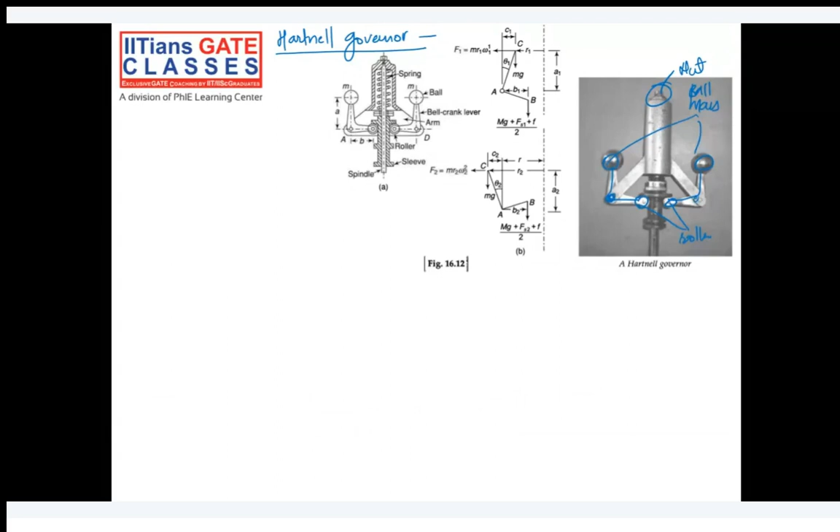We have two bell crank levers here, this is 1 and 2. Each of them is carrying a mass at one end and a roller at the other end. So this is roller and this is mass, this ball with certain mass. We have bell crank levers, at one end we have attached masses, other end we have attached rollers, and they are pivoted at these points. These are the pivot points. I'll use the red pen to show the pivot points.

Other dimensions are also given. a is the length from the pivot point to the center of the mass of the ball. Small b is the length of the pivot point to the roller center. Small m is the mass of the ball. All these things you already know.

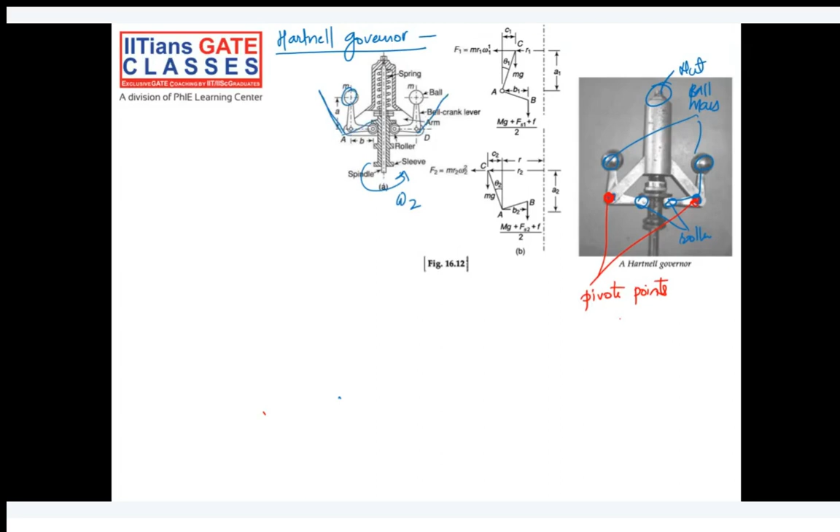So what will happen if I let's say run the spindle with a higher velocity? Let's say omega 2 is a higher velocity and omega 1 is a lower velocity. Let's say it is rotating at a higher velocity, what will happen? These masses will go away and the sleeve will move up. Do you agree? So this figure you will see, this figure is more or less the same, right?

This situation will get at a higher omega. When omega is lower, what will happen? These balls will try to come closer and you will get this kind of figure. So the position of A, B, C is shown here. You should compare: this is at a lower omega, this is at a high omega. I hope you are following till this. Is it clear? Any doubt till this?

The only thing is we have spring force. So spring force will come into the picture. Previously, what we studied was only centrifugal force. Later we added the mass of the sleeve and the friction force, and now on top of that, spring force will come into the picture.

Let's see here. At point C, we have F2 force. This is centrifugal force because of omega 2, higher RPM, m r2 omega 2 whole square. And at point B, we have three forces now: mg plus F. Because the sleeve is moving upward, frictional force will be downwards. So mg plus F plus Fs2. Fs2 is the spring force.

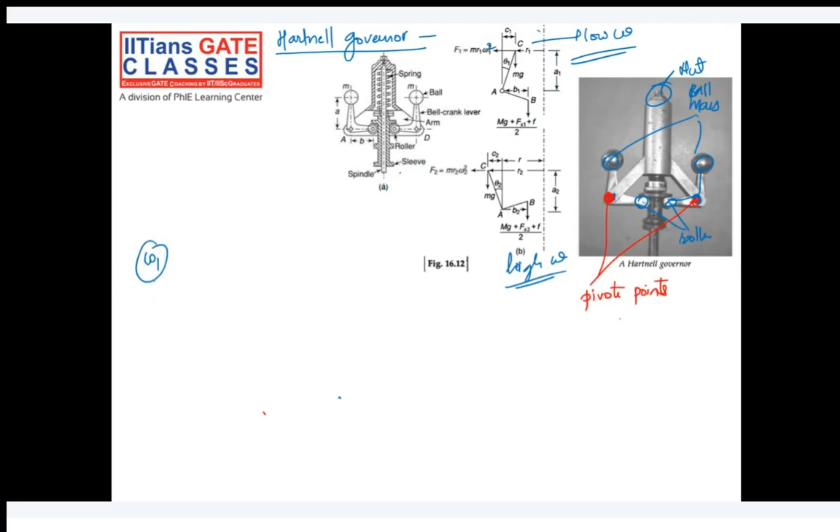So if we take a moment at fulcrum A, what will happen? At the pivot point, if we take a moment from the first figure, when the omega 1 situation is there, I can say F1 into A1 equals half of (mg plus Fs1 plus small f) times B1. And the balls are also taking a clockwise moment. This is clockwise, this is clockwise, this is counterclockwise, so it is plus mg into C1. C1 is this.

mg C1. When omega equals omega 2, F2 A2 is equal to half of (capital M G plus Fs2 plus F) times B2 plus mg times C2. It's minus basically because it's a counterclockwise moment. To make it more simple, generally theta is very, very small. These theta 1 and theta 2 angles are not too large. Theta 1 and theta 2 are very small in the working range, so we can say that A1 is equal to A2 generally, and B1 is equal to B2 generally. So what does it mean? C1 equals C2 equals 0. So you can neglect these two terms.

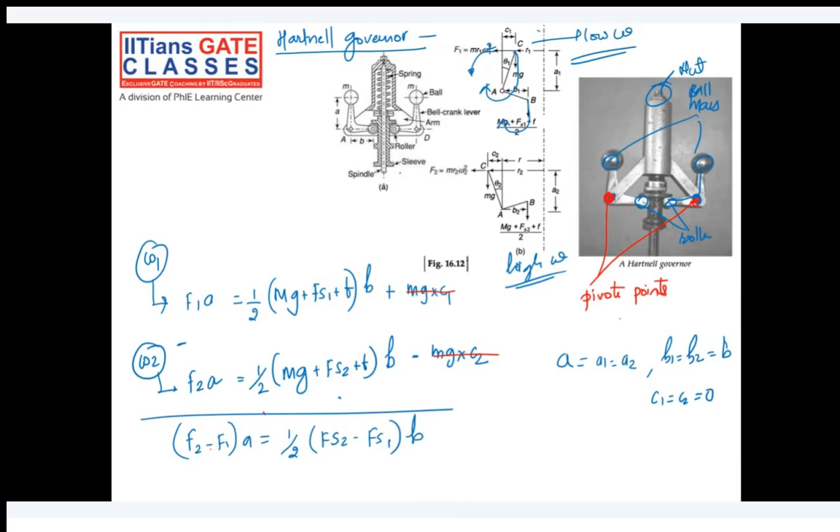Now if you subtract, what you will get is F2 minus F1 into A is equal to half of (MG will get cancelled) Fs2 minus Fs1 into B. So from this I can further write Fs2 minus Fs1 is equal to 2A by B times (F2 minus F1). So the difference in the spring force is equal to 2A by B times F2 minus F1. What is F2? Centrifugal force in the second case, minus F1, the centrifugal force in the first case. If you include the stiffness of the spring, Fs2 minus Fs1 can also be written as h1 times S. What is S? S is the stiffness of the spring.

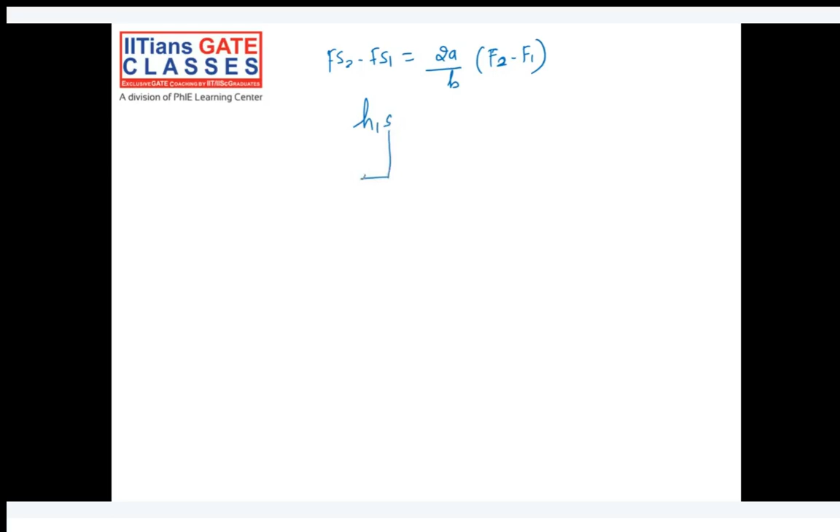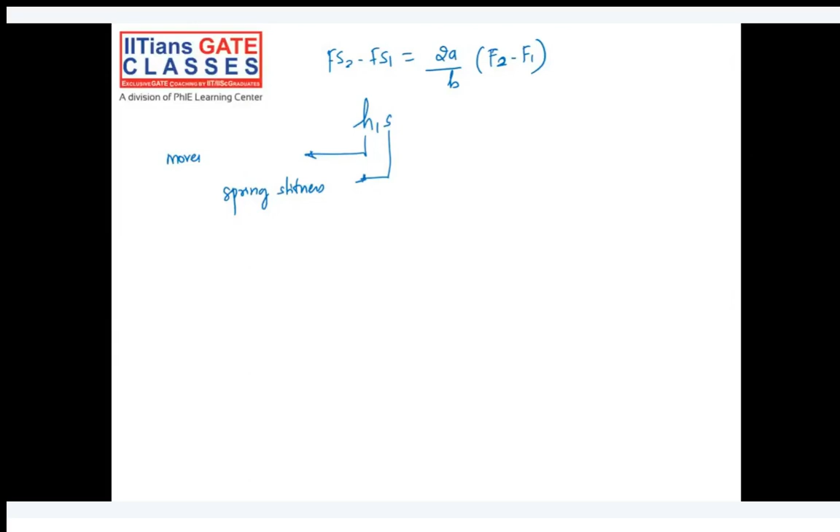And H1 is, let's say, a movement of the spring. How much deformation, by how much length the spring is moving. So it's a spring, sorry, the sleeve is moving. By how much length the sleeve is moving. Okay, that is equal to 2A by B (F2 minus F1).

Okay, so from this I can say S is equal to 2 by H1 into A by B (F2 minus F1). Okay. H1 is movement of the sleeve. Movement of the sleeve, if you see here, if I go to the previous slide, the sleeve is, let's say, moving from this distance to this distance, right? It is moving by a certain distance.

So I can say, it corresponds to the radius R2 and R1. Okay. I can say that H1 can be written as theta times B basically. Okay. Or in other words, (R2 minus R1) by A into B. Okay. Let me just rub this to avoid the confusion. This part, okay, on the figure.

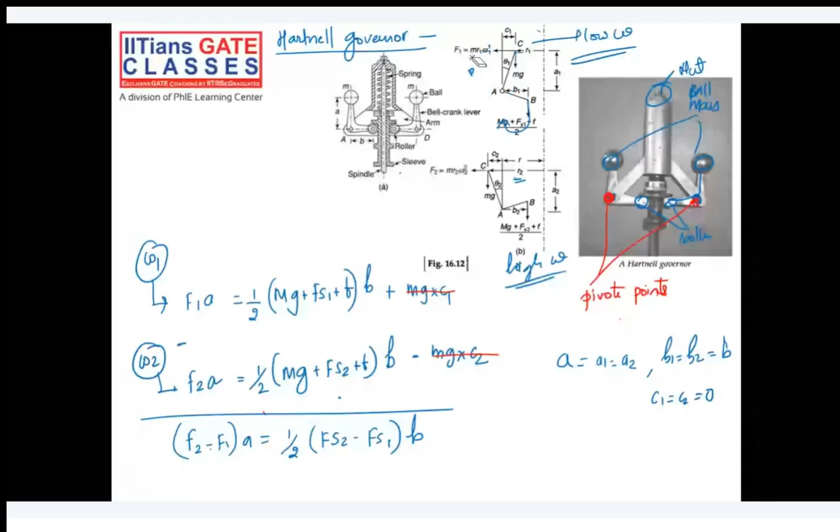Yep. So try to understand what I'm saying. I'm trying to write the H1 value. H1 is movement of the sleeve. Okay. The sleeve will first move, let's say, from here till here. So a certain distance it is moving. Okay. So theta times B. This horizontal distance is B and this is theta. So theta times B will give you this distance. Okay. So that's how I'm writing H1 is equal to theta times B.

Theta times B. And what is theta? Theta is perpendicular over base. For small angle, theta is equal to tan of theta, you can say, and that is (R2 minus R1) by A. So I can say it as (R2 minus R1) divided by A, and B was already there. Okay, because I'll write here H1 is equal to theta times B, and theta is (R2 minus R1) divided by A, and B is as it is. So that is what I have written, into again A by B, and into again (F2 minus F1).

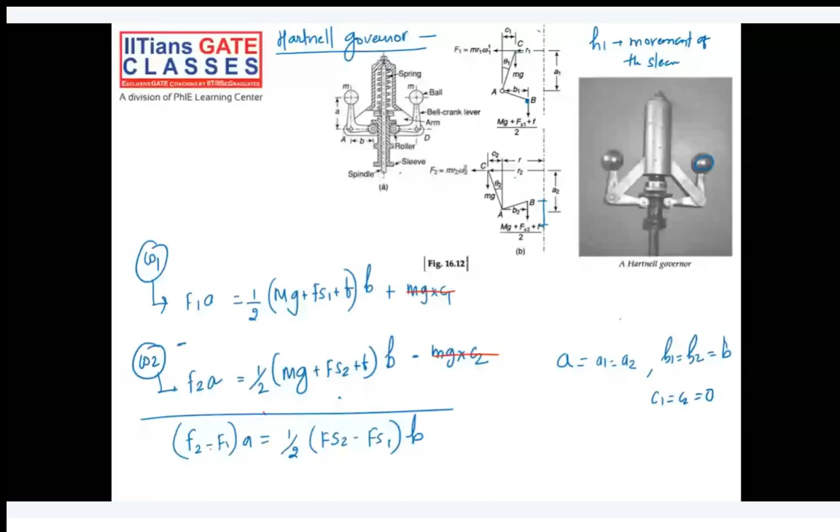Yep. So ultimately, I would not expect you will get difficult questions from this governor topic, but mainly you can expect the questions from Porter Governor and the Watt Governor, and if you know the relationship between them, you should be able to easily answer the question. Okay, not only theoretical but also numericals you can easily solve.

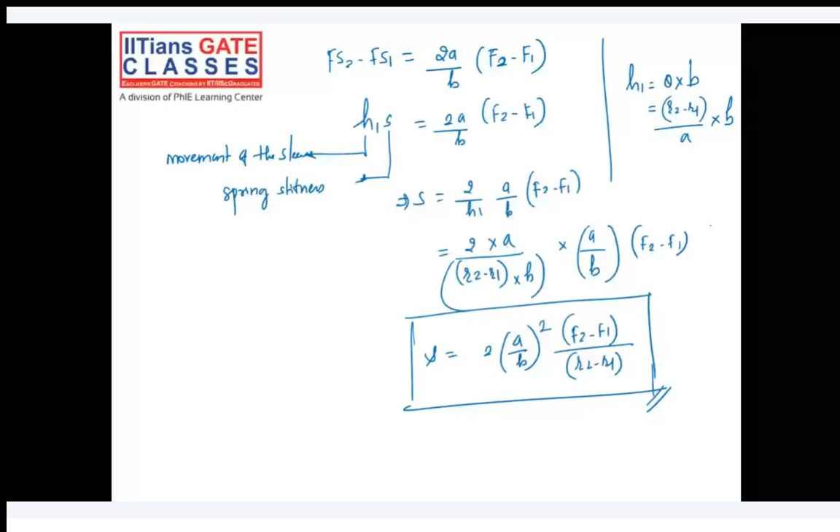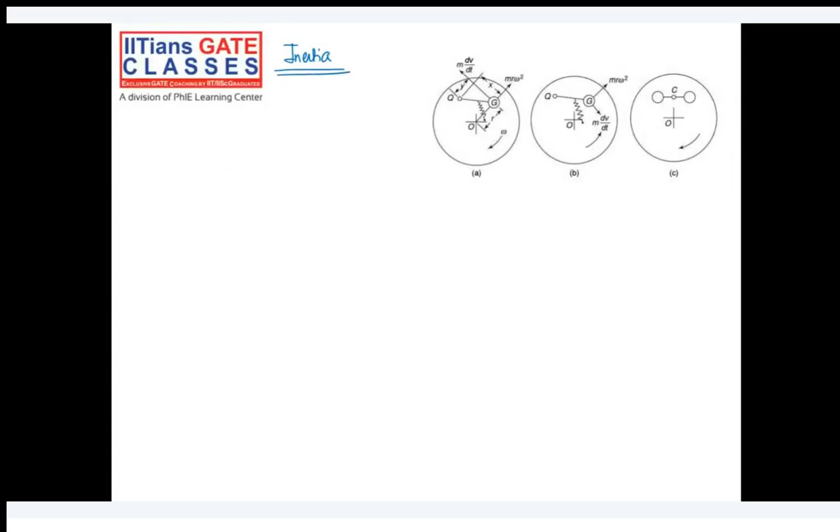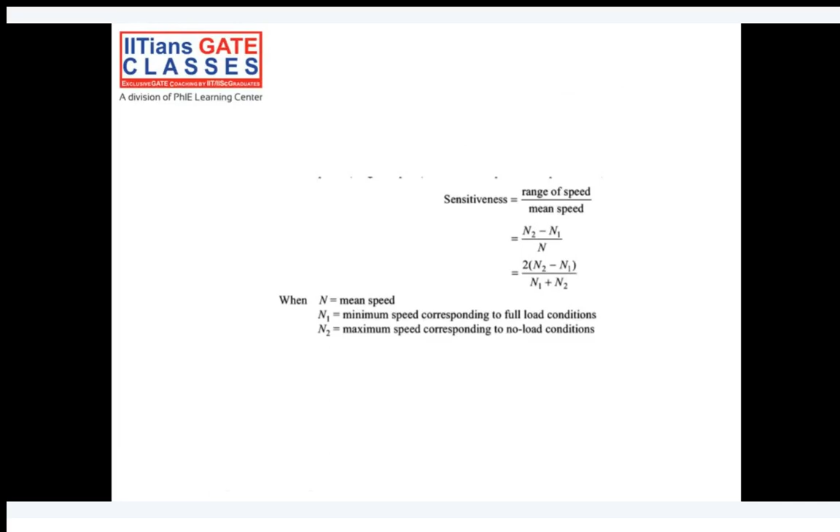Okay, we are at the end of the session. There are a couple of points which remain from this topic, such as the inertia governor. So this is an inertia governor which we'll study in the next week. Okay, how the inertia governor works. We also have to understand what is the sensitivity of the governor, what is the concept of hunting in a governor. Let me write it. What is the concept of isochronism? Isochronism. What is the meaning of stability of the governor?

Okay, and then the last point would be the effort of a governor. Okay, so these are the major points I would expect we'll complete in the next class, and then in the next half session we will study the new topic.

Okay, either we'll start cams, because three topics remain for you. One is cams, another one is balancing, and the last one is dynamic analysis of linkages. Okay, I would expect we need at least three classes to cover these topics, and then we'll start numericals. So probably next to next week we'll start the numericals. Okay, we'll go through some previous year questions, not only numericals but also some theory questions as well.